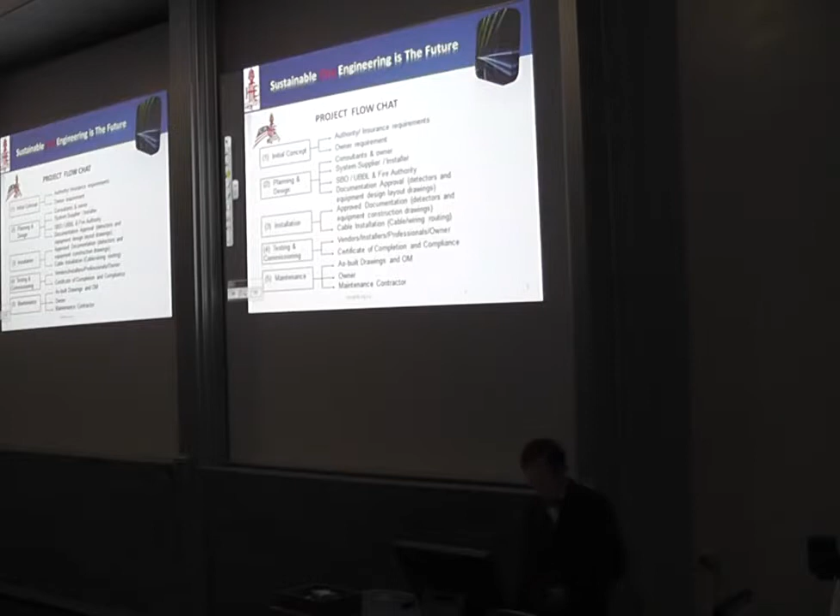Once the building is completed, you need to do proper maintenance. A lot of people spend a lot of money building buildings, but they fail to maintain them. At the end, everything becomes a white elephant.

This is actually a high-speed water deluge system at a workstation in an ammunition depot. They use optical detectors joined up by optic fiber to have a response of probably about 100 milliseconds to activate the suppression system. It's very effective.

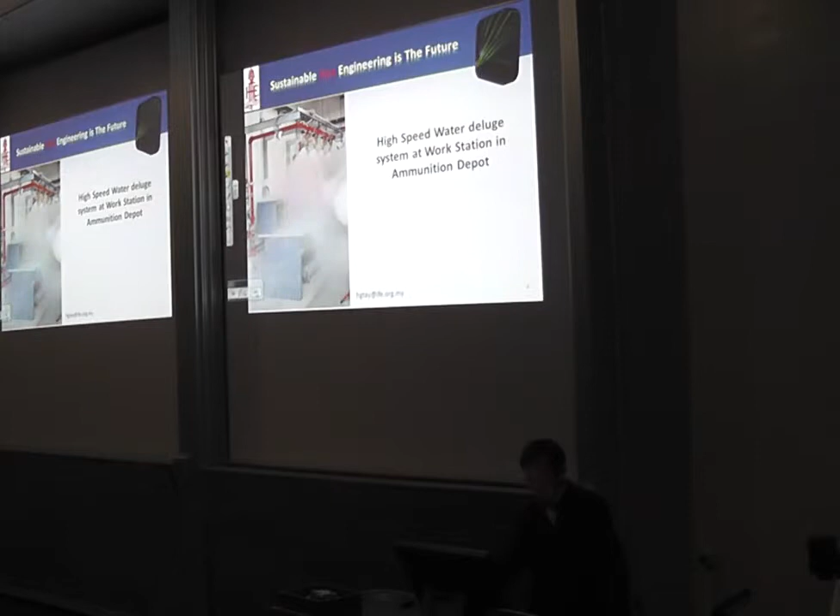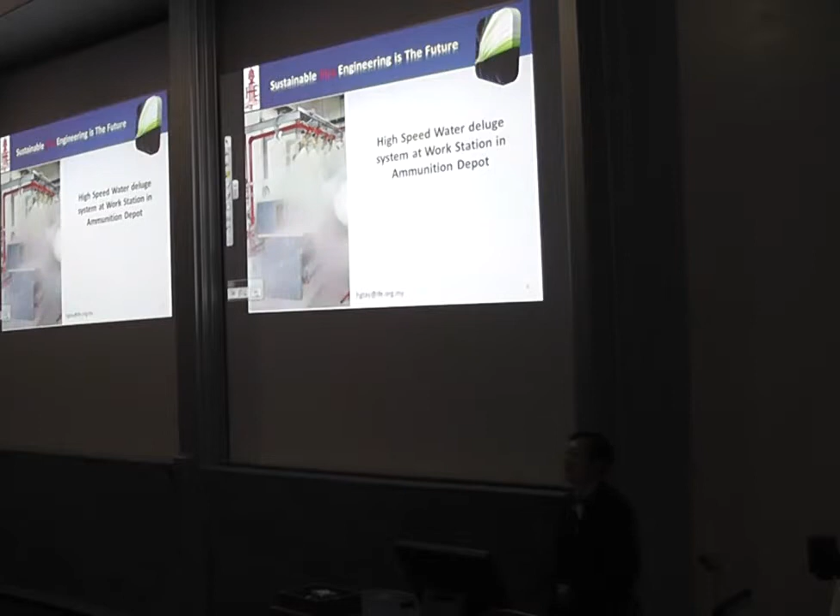But then Singapore, when they built their ammunition depot, changed the concept. They said, why should we go to that extent to allow a fire to happen and then try to put it out? It's always lousy to have post-fire action. I think nowadays we should look at pre-fire, preventing things from happening. So what they did for the ammunition depot, for the few rooms used for storage, is lower the oxygen content so that no fire can ever happen. That's the new thinking, and of course there are other safety measures they have to deploy.

I think nowadays all fire engineers will have to look at changes in our environment. We cannot just look internally, we have to also look at the external factors that are going to affect the design of a building.

Tell me, is bungee jumping more hazardous, or driving on the motorway? Motorway. Why? There's more of it - big volume, big problem, big volume of people. I think you're looking at the duration of exposure to risk. Agree? I did my bungee jumping in Queenstown, New Zealand. The whole process was over in about 5 seconds. Driving from here to London takes you, what, 5 hours? So you look at the duration of exposure to risk.

If you happen to be born in one of these countries around this so-called ring of fire, the Pacific ring of fire, you are a little bit unfortunate. Alright, so you see, sometimes risk is beyond our control.

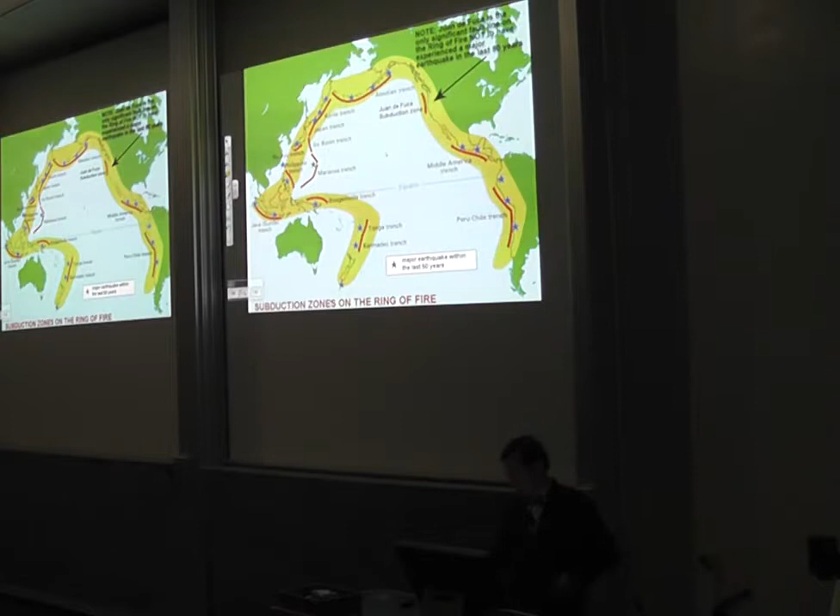I think all of you are aware of this natural disaster that until today, the Japanese government is trying to deal with. Now Japan, I believe, other than the US, is one of the most well-prepared countries in the world. Now how on earth did all this happen?

When we start looking at the precaution measures that were taken, suddenly we find there's still room for improvement. Of course there are a lot of other reasons I do not want to mention here. Apparently, about 3 months before the disaster struck, they were supposed to carry out a risk assessment exercise. They did not carry it out, but rather faked a risk assessment report. So you see, things can also happen in advanced countries like Japan.

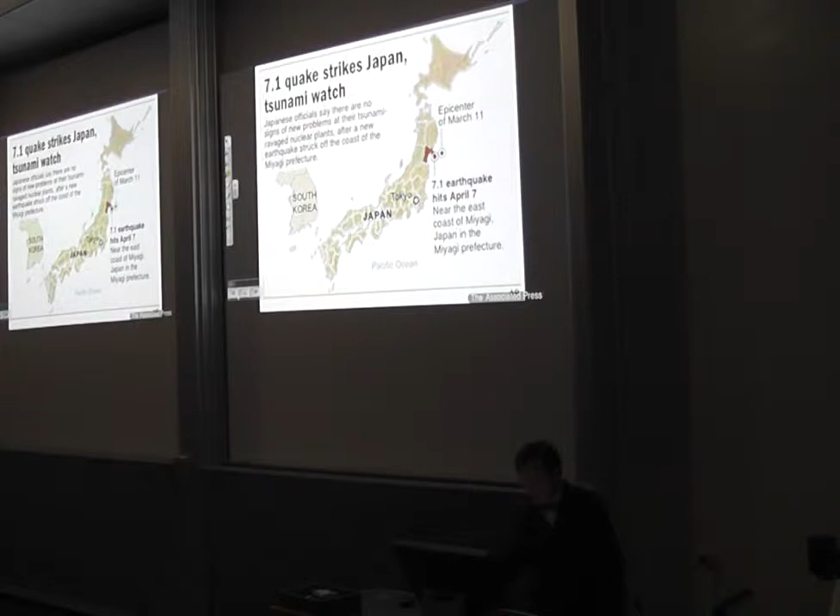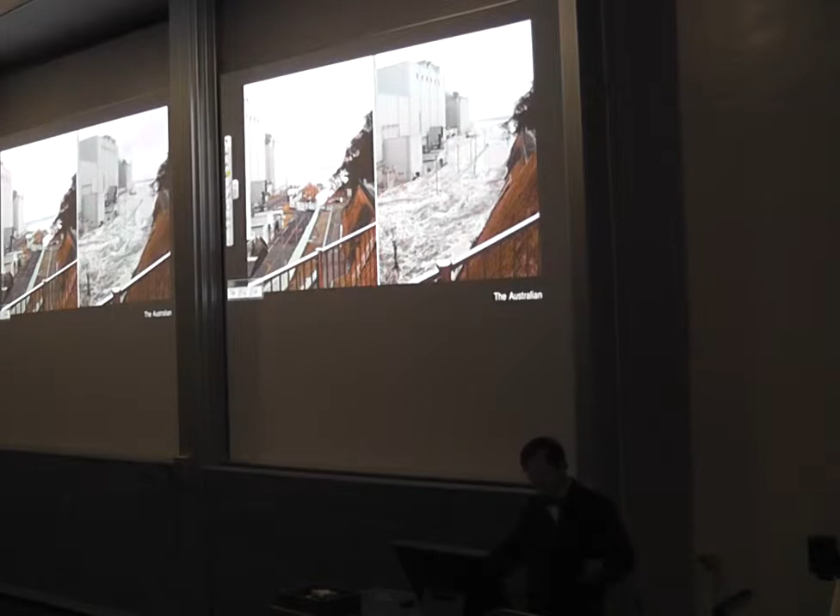They do anticipate earthquakes and tsunamis, but the design of the wall to stop the tsunami wave wasn't high enough. So you have the disaster. Can you imagine such a beautiful country totally destroyed?

And the problem does not stop there. With the radiation, probably a lot of places will not be habitable for the next, I do not know how many decades. We cannot ignore the force of nature. If you look at all these pictures, they paint 1,000 words. One lesson we learn out of that.

If you look at this particular township near the coastal area, only the concrete structure buildings remain behind. The rest of the wooden buildings are all gone. And yet they are green.

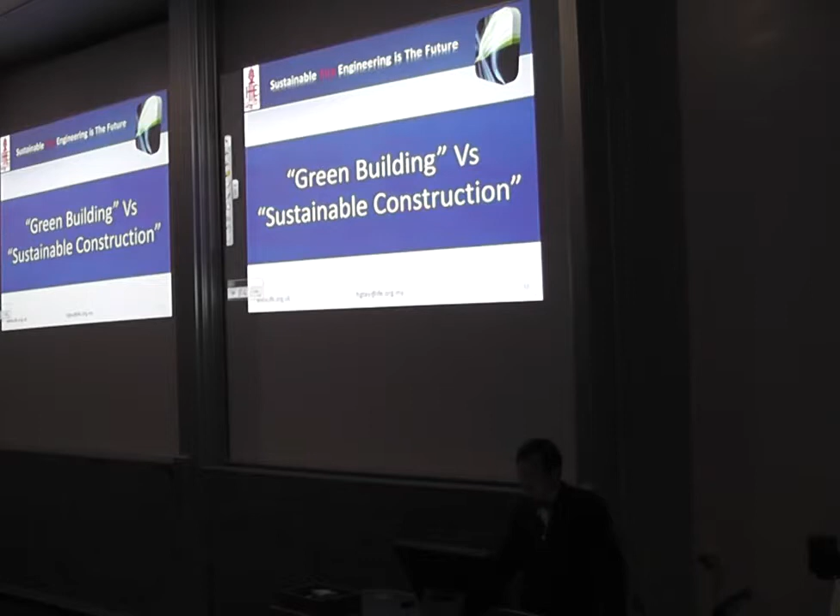So how do we look at sustainable built environment? We have to look at the challenges ahead. So, green building, sustainable construction - are they the same? Or are they variants?

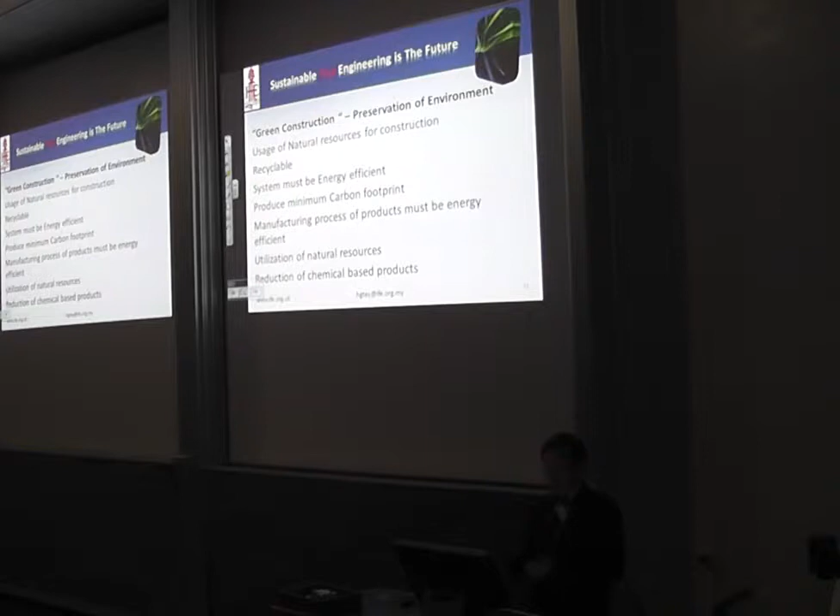For green construction, you look at preservation of environment, usage of natural resources for construction, material must be recyclable, system must be energy efficient, must produce minimum carbon footprint, and the manufacturing process must also be energy efficient. And of course, you must use as much as possible natural resources with reduction of chemical-based products.

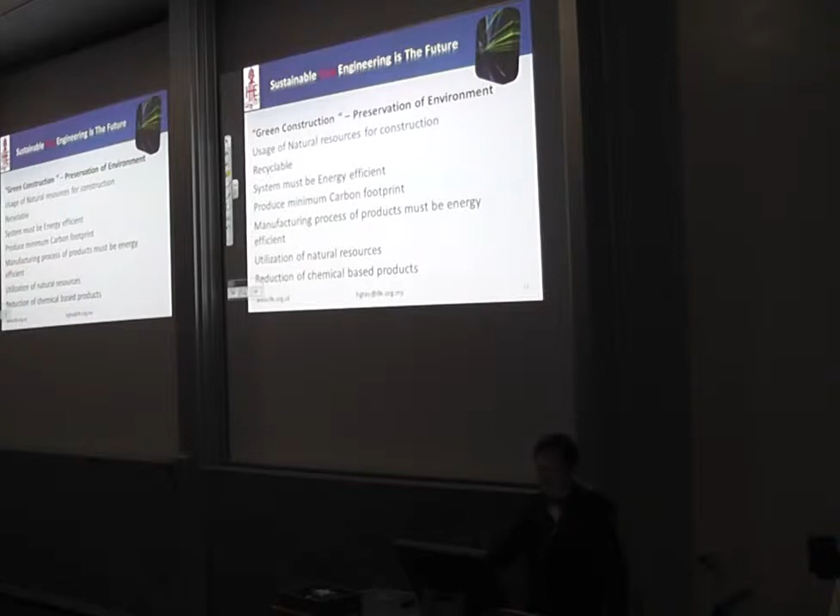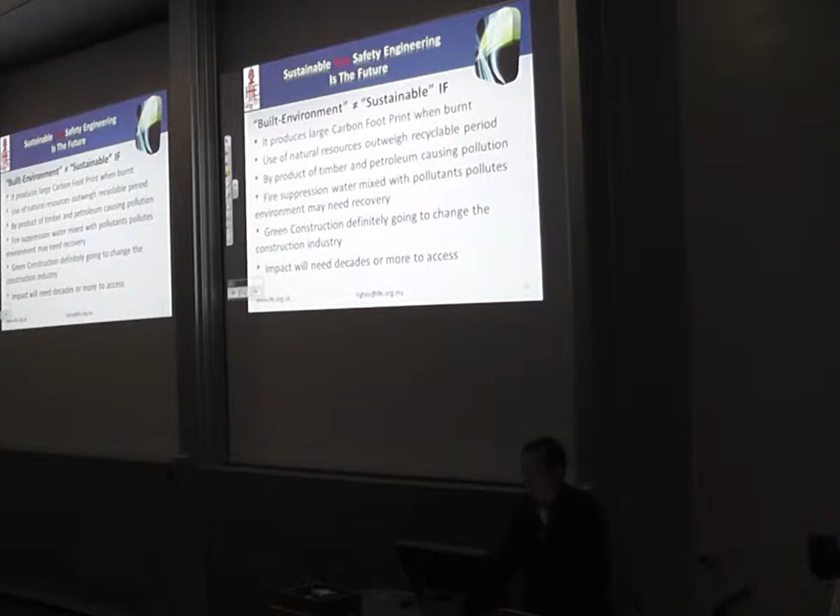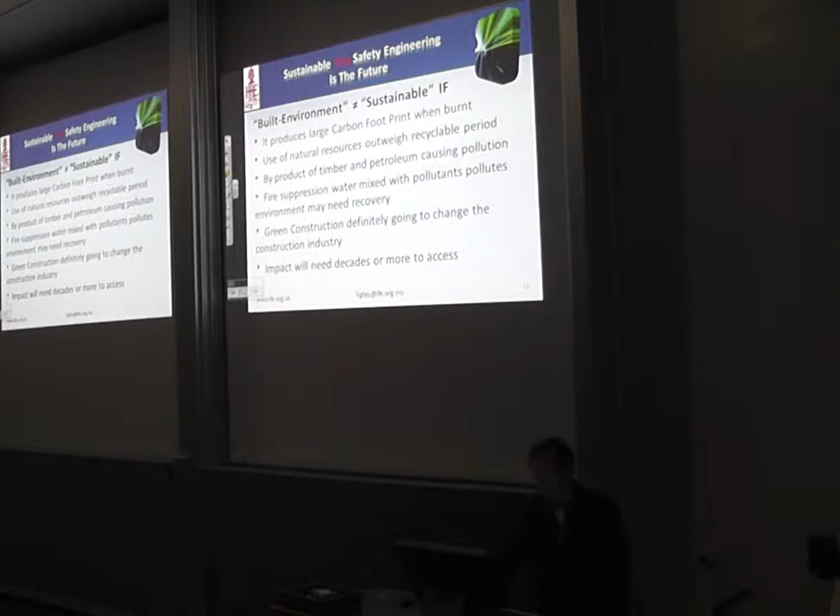But built environment is not sustainable if it produces a large carbon footprint when burnt. Use of natural resources can outweigh the recyclable period. For example, timber - yes, you can grow a tree again, but if timber construction is easily burned and a tree takes 20 years to grow, you can do the mathematics. Byproducts of timber and petroleum also cause pollution.

If you look at synthetic products versus organic products, there is a lot of difference in the byproduct generated due to a fire incident. Now we are also looking at fire suppression water mixed with pollutants, which also pollutes the environment, and they also need recovery. This is a very, very expensive exercise, and they're still pondering how to do it properly.

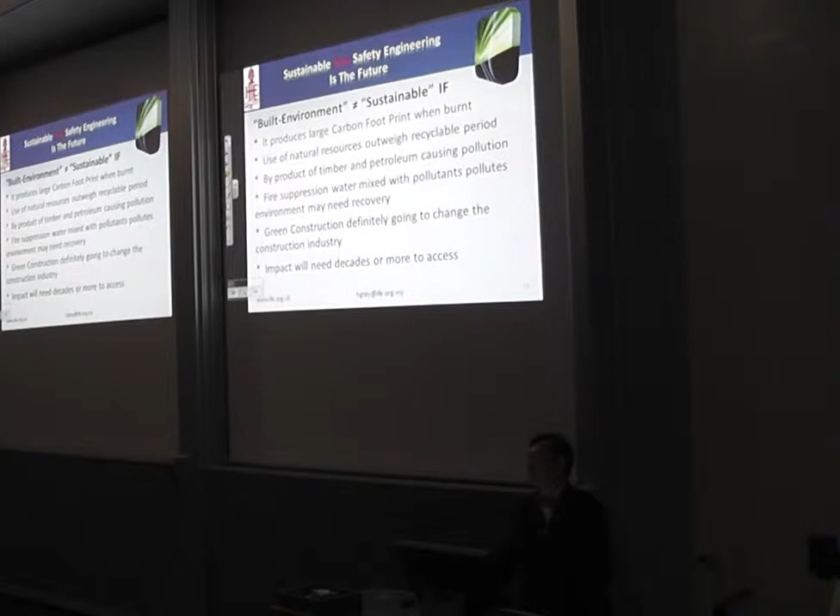Green construction, even though we are deliberating now, is definitely going to change the construction industry. But the impact probably will take decades or more to assess. If you look at major fires nowadays, the tank farm fires, the amount of pollution is terrible.

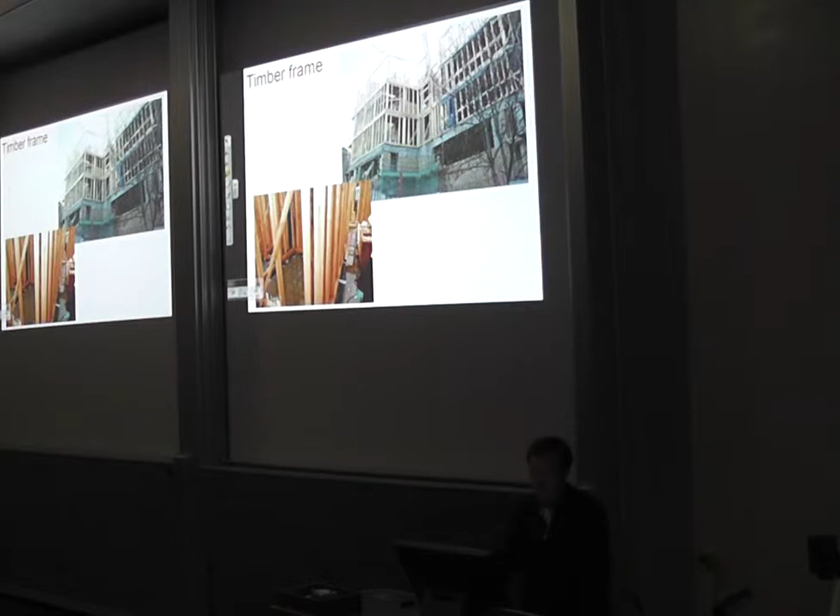In Europe and other parts of the world, they are trying to experiment with timber frame buildings. But it does produce a lot of fire risk for the firefighters. In fact, when we were at one of the conferences, the Deputy Commissioner of London Fire Brigade said that with this type of construction, their firefighters are actually safer now, because by the time they get to the fire scene, everything was burned down. Firefighters don't even need to go in and risk their life. It may be a joke, but it reflects the irony of the so-called green concept.

There are a lot of so-called innovative designs of drywall construction. But if you look at the materials selected, not only are they highly combustible, the byproduct of the insulation material is also highly toxic. So I think we should not be looking at just one particular criteria. In Malaysia now, we are looking at using toxicity as a mandatory criteria for selection of materials.

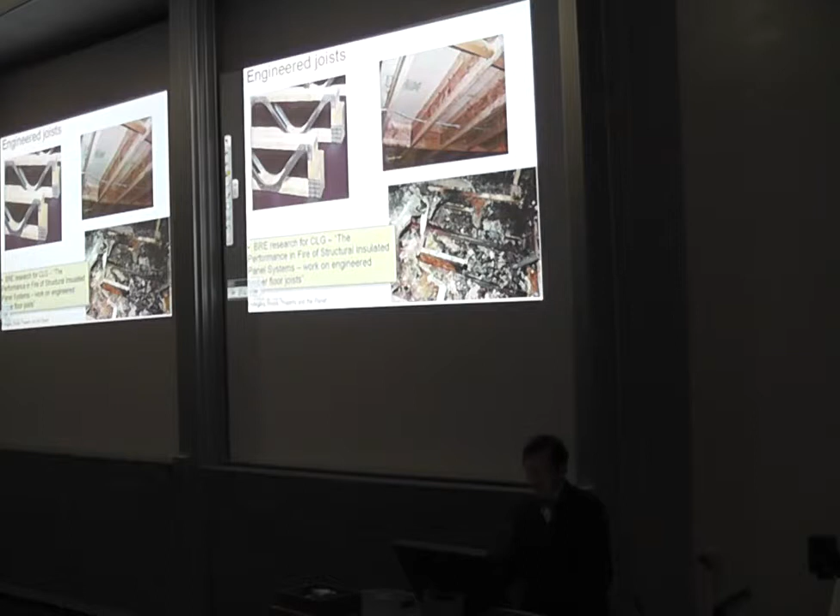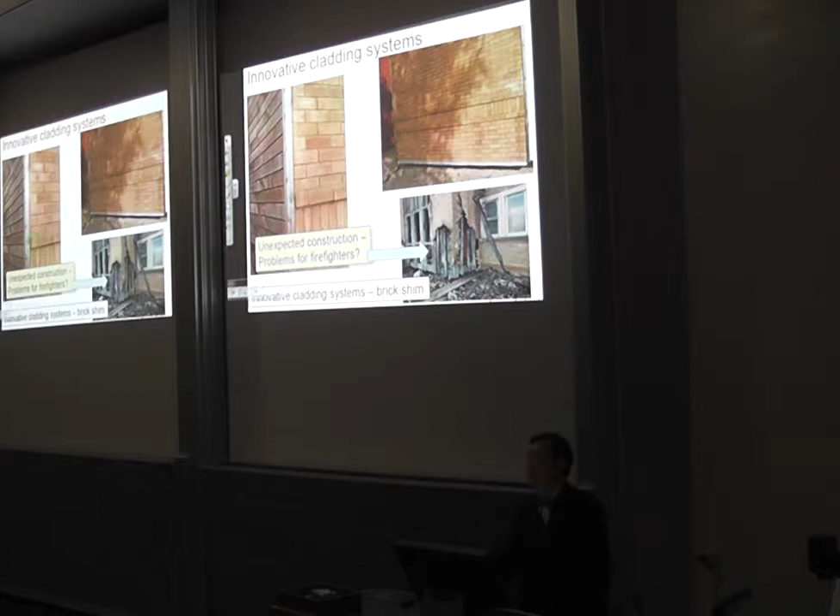Looks like a brick wall, but is it brick? It's not, it's chipboard. You can see that. It's camouflaged with only a layer of mortar externally.

I think the danger about all these new, innovative cladding systems is, other than withstanding the fire rating, can they also withstand the pressure of the jet when firefighters put it on? After 1 hour, the whole structure might collapse under pressure.

So you see, it's more than just talking about toxicity of the material. We are also looking at the life safety of the firefighters, because when you have a fire alarm, everybody else runs out of the building. Who runs in? Firefighters.

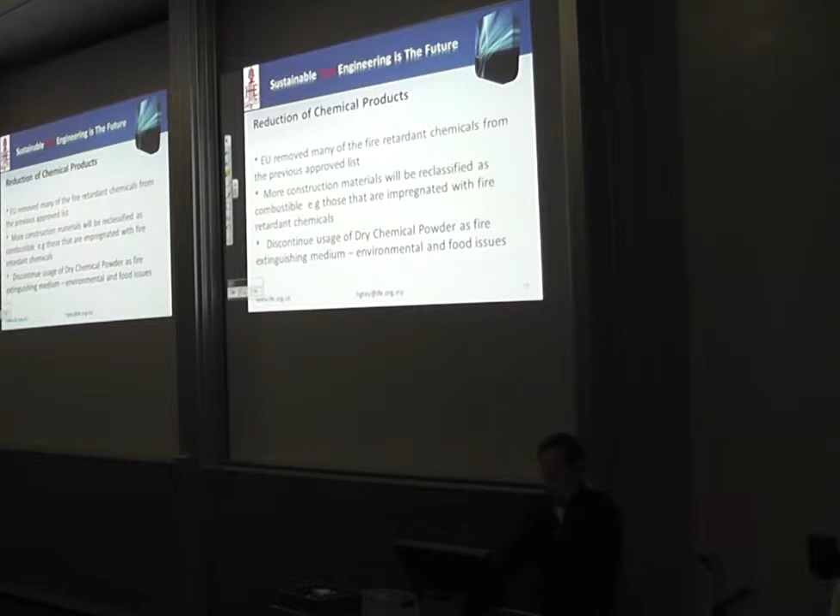Reduction of chemical products is the right direction to go. The EU removed many of the fire retardant chemicals. I think that's the way forward.

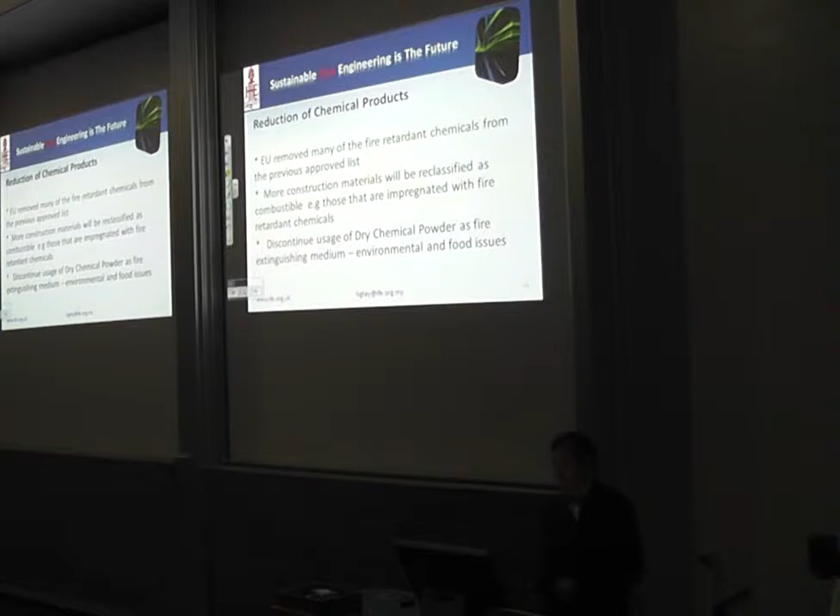But that also has implications, because now more construction materials will be reclassified as combustible. In the past, we impregnated those materials with fire retardant chemicals, but nowadays, with those prohibited from being used, carpets and all that will then become combustible.

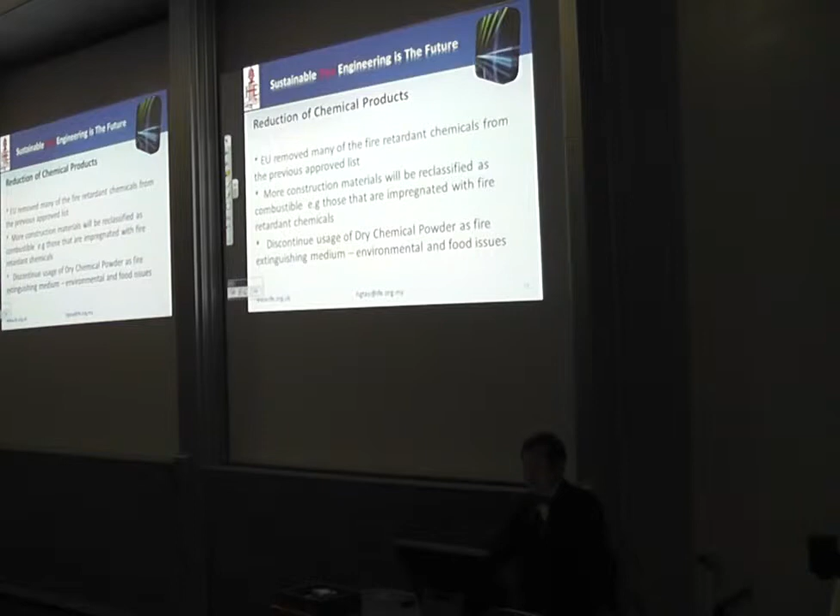Also, there is a trend - I believe Europe already did it - dry chemical powder is not allowed to be used for portable fire extinguishers. In fact, if you look at dry chemical powder, they're actually chemical based.

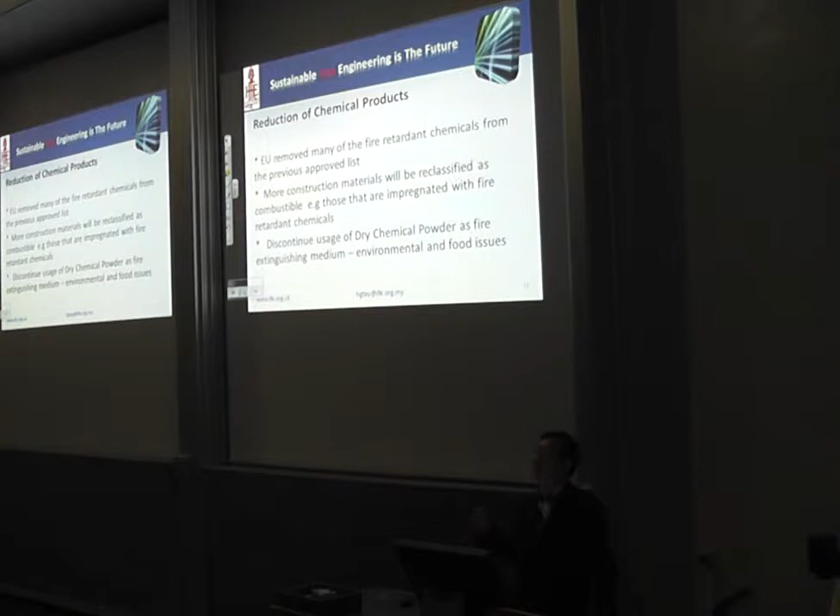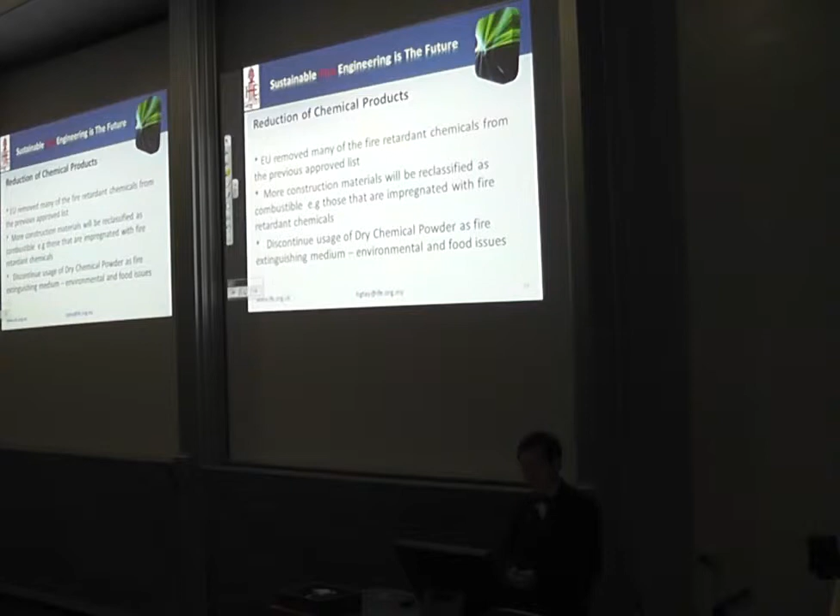And because of the world shortage of food, dry chemical powder is actually being used as fertilizer. So there will be great competition, and definitely the food industry will need more fertilizer than the fire industry. So Europe has now turned to water and foam.

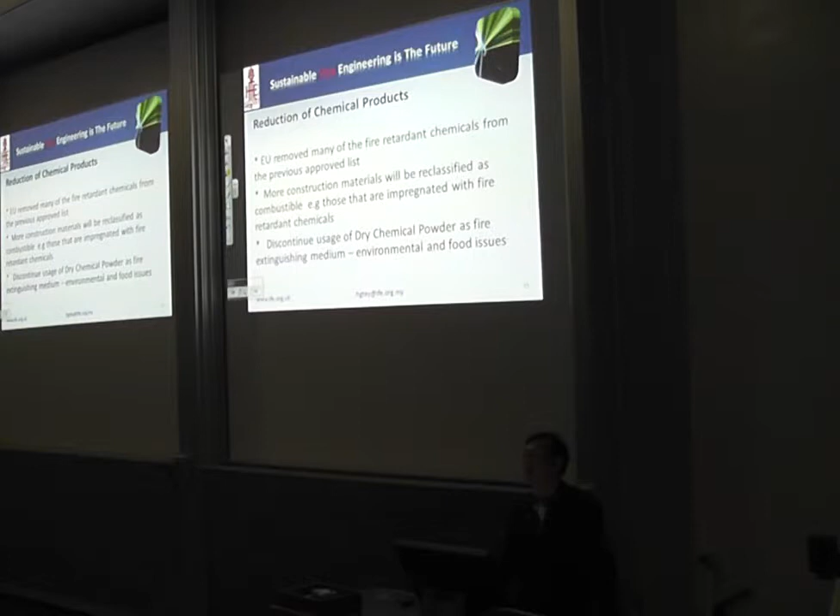I don't know whether any of you have tried your hand on the dry chemical fire extinguisher. Has anybody tried using one? Do you find a stench smell coming out of the powder? One word of advice: you better make sure you select the upwind area, otherwise you might look like a Christmas tree.

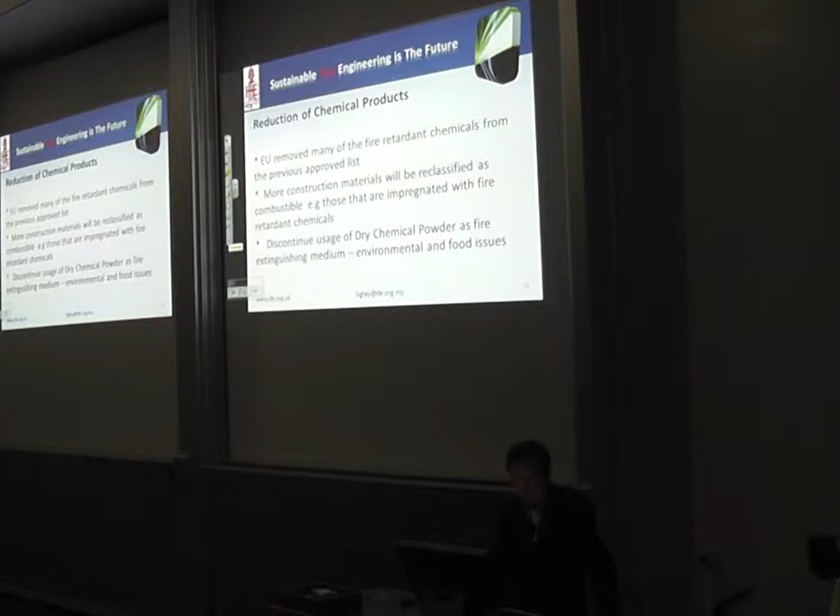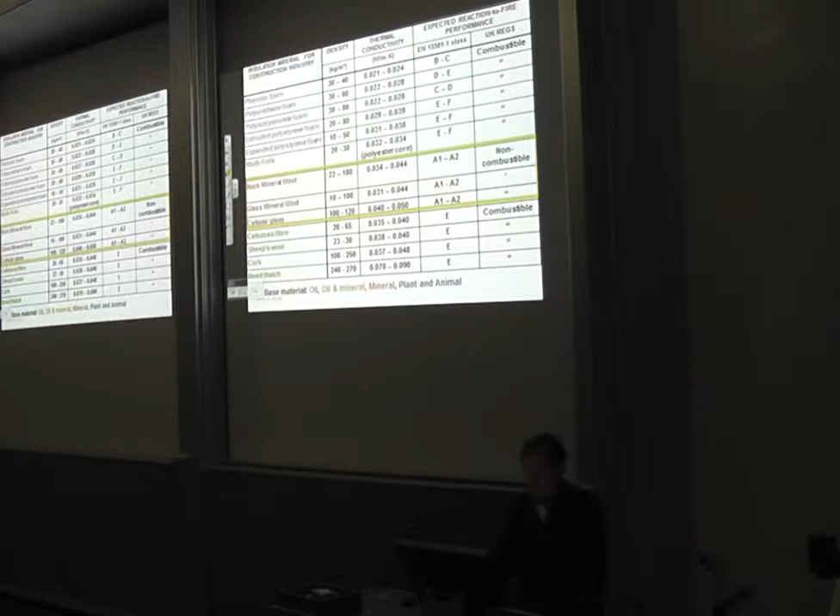Next thing we're going to look at is fire hazards and fire risks.

Fire nowadays, the so-called modern fire, changes in character, changes in duration, changes in many things, because we use so many types of synthetic materials.

Modern synthetic materials generate high heat flux, moderate smoke intensity, but ever presence of toxicity. And through that, it increases the pyrolysis process and shortens the flashover period. That makes it very, very dangerous.

Now, most buildings, when they are constructed, architects will design very basic finishes. Most of the internal finishes are all carried out by interior decorators. This group of people are not under any jurisdiction. They do not need any approval. And yet, they are the ones who put all the fire risks into the building.

Because of budget constraints, interior decorators, when they put in furnishings, normally look for economical materials with aesthetic value. But a lot of these materials are highly combustible. That's reflected in so many fire incidents around the world.

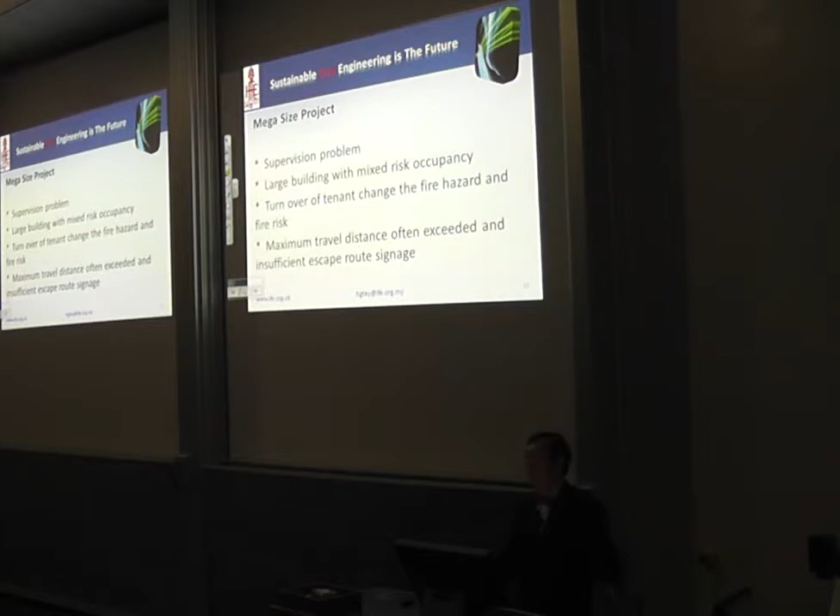Also, mega-sized buildings come with mixed risk occupancy. It's very different from an office block or hotel block. You have office, hotel, apartment, shopping center, restaurants, everything within a complex. More important, the turnover of the tenants. You could conduct safety briefings for the tenants, but if the turnover of the tenants is large, then you're going to have another problem. Plus, a new tenant could bring in new risks. Just like a telco company that occupies 3 floors of a tower block. Imagine how many tons of PVC cable they're going to bring in with them.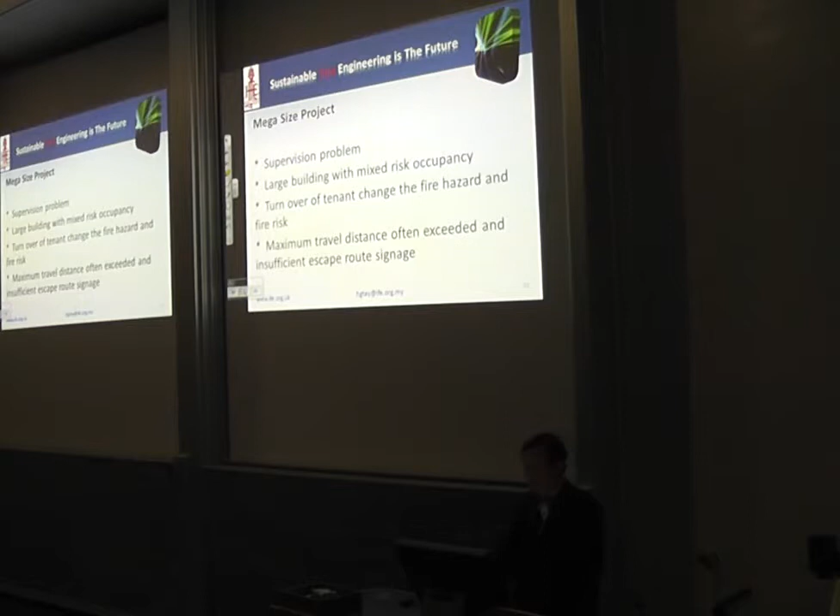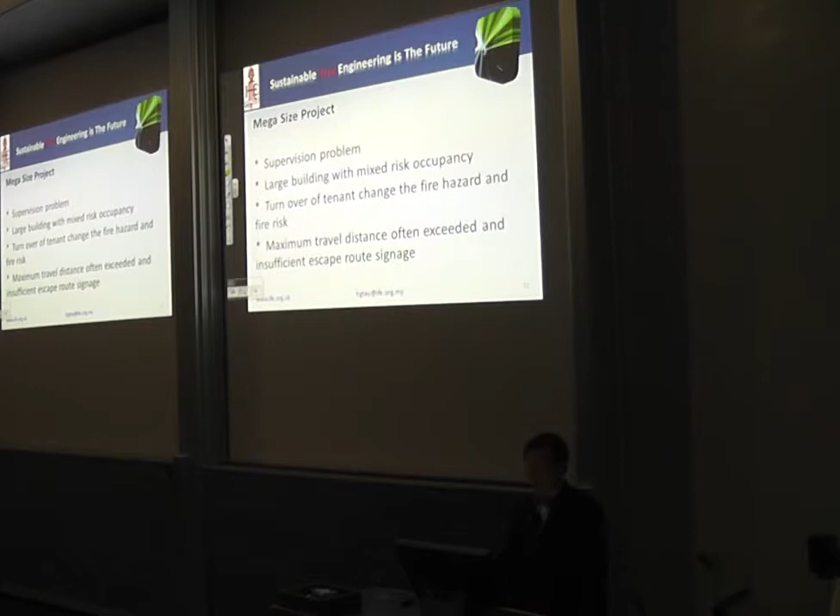And because of the sheer size of the project, maximum travel distance is often exceeded. If you go into one of the major shopping centers nowadays, you'll have a hard time finding the escape route if you're not familiar. And under the influence of smoke and heat and the commotion, orientation of direction will become a problem, especially with the seasonal crowd density. During the festive seasons, the crowd intensity definitely increases. What about tourists who come into the country and are not familiar with the language?

So crowd control becomes one of the major problems for modern construction during an emergency. And it's very, very difficult because human beings are at times not controllable. You can set up a lot of procedures, you can do a lot of drills, but under panic conditions, everybody behaves very differently. You're looking at fire. What about gas, explosion, tremors, possible terrorist attack? Who is going to manage all this?

So it's no longer only a building owner's problem. The emergency response planning and management must be jointly conducted by building owners, fire authorities, civil defense force, National Safety Council, etc. And it must be conducted with tabletop drills, followed by actual drills.

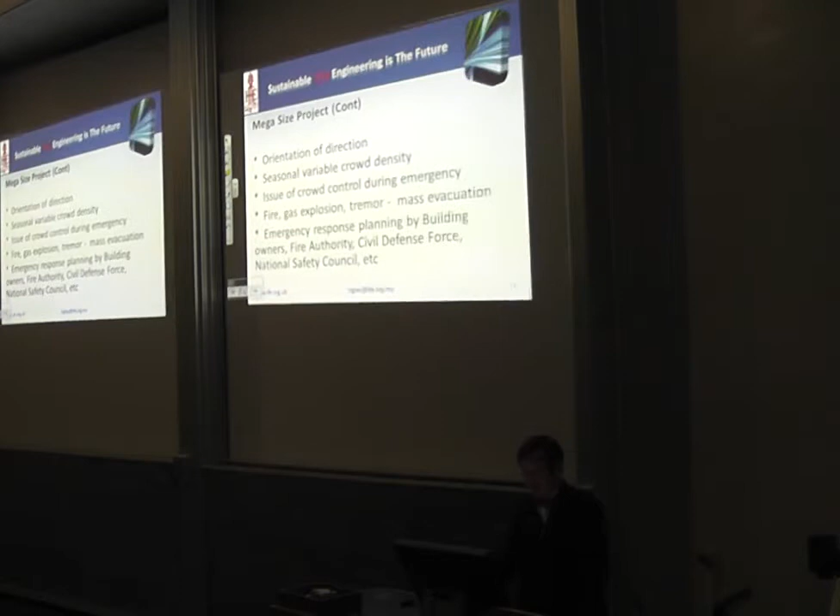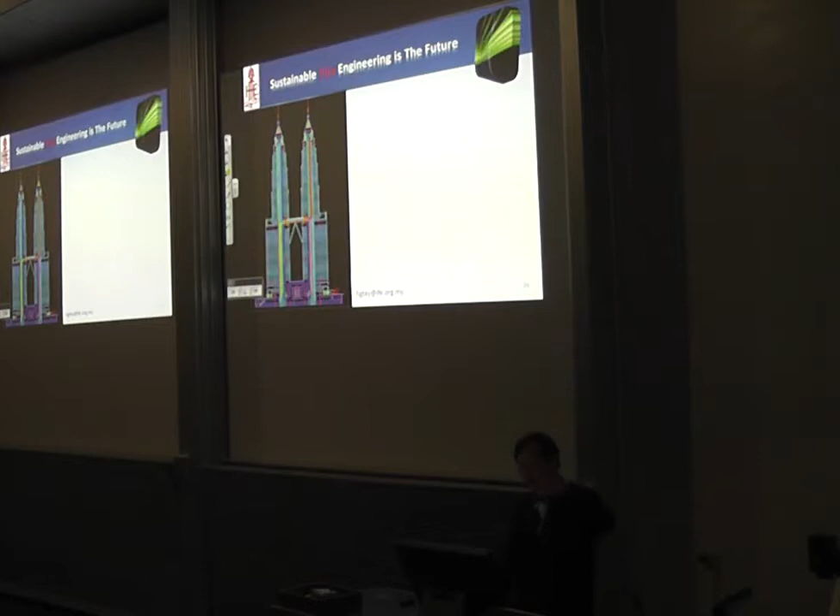Twin Towers in KL, how do you evacuate all the occupants? We divide the building into two halves. So if you have a fire on the lower part of the tower, on the left-hand side block, the top half of the tower will be asked to evacuate by staircase. In the tower on fire, the occupants will be asked to cross over the sky bridge on the 41st and 42nd floor. And after that, all of them will be taken down by high-speed lifts.

But having said that, this cannot be a general ruling applying to all high-rise buildings, because it has to be carefully planned and it also must be managed. Which means that the management must have sufficient personnel to be trained and to manage all the crowd. All the lifts are operated by operators, not by the occupants. Everybody is trying to beat each other. I mean, how are you going to evacuate buildings of this nature?

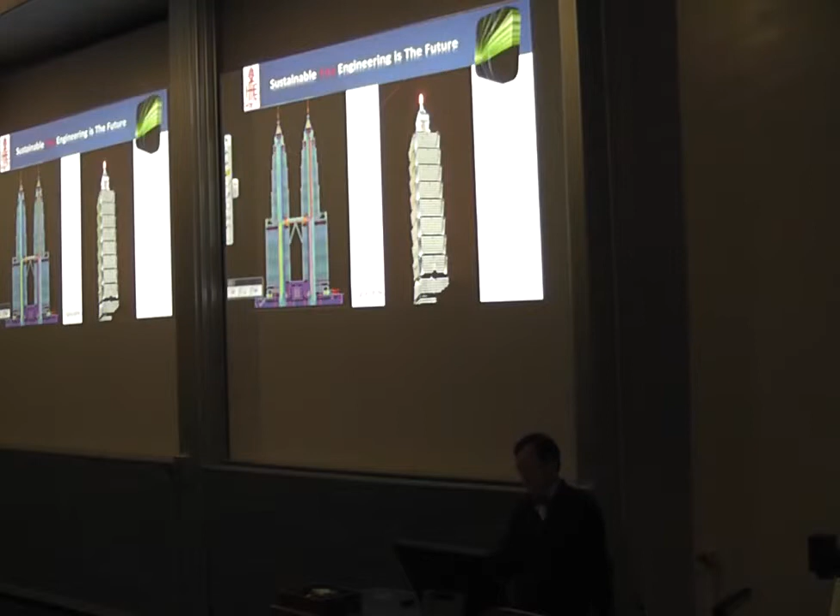I was in Hong Kong recently, and now in Hong Kong, they have a building requirement that every 25 floors for high-rise buildings, you must provide a refuge floor. Of course, they are saying that if the building is about 80 stories high, not everybody can evacuate by staircase from the top to the bottom. I agree. So they set up a refuge floor for you to have a rest.

Sounds all very good, and they also break the continuity of the staircase. So every 25 floors, you have to go around the refuge floor to descend by the other staircase. The thought behind that is that if you have one staircase going from the top floor all the way to the ground floor, in case the fire or the smoke gets into the staircase, nobody else can get out. But if you break the staircase, of course, it's safer.

But there are a lot of other observations that I made, and since the camera is on, I don't think I want to talk about it here. All right? Tea time, we can discuss.

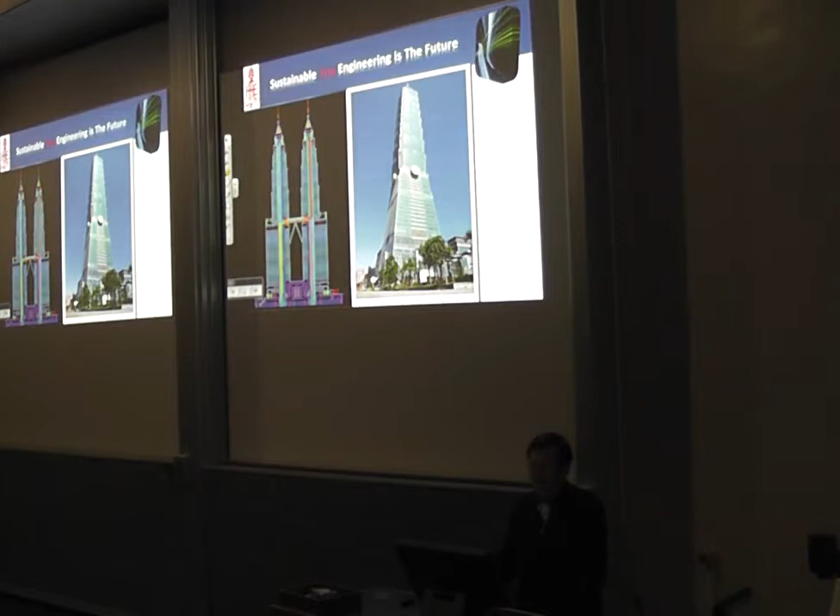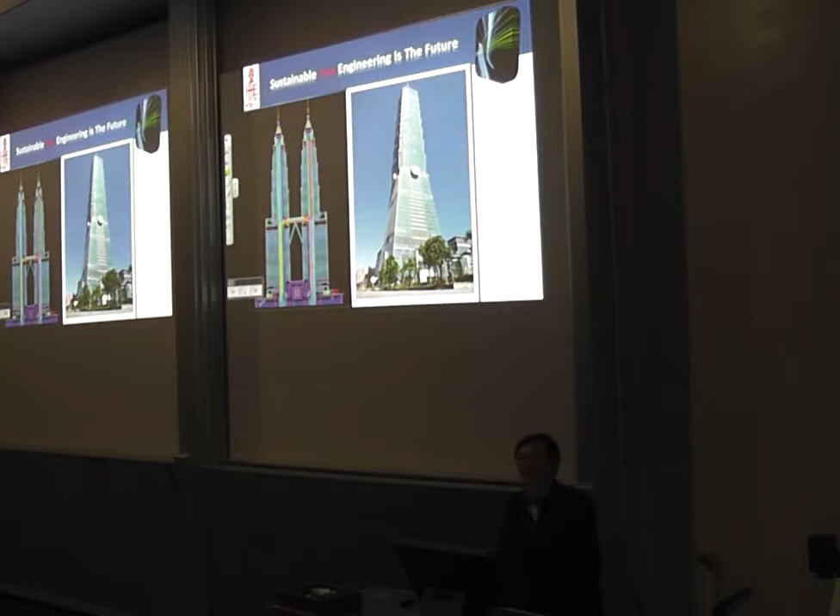There are a lot of things that have to be done because it has to be managed. When people start to rest, the question is who decides, or when are they going to carry on? If you rest for 30 minutes, the situation below, assuming the fire is below, has it escalated to what stage? Is it safe to carry on? Or is it safe to actually stay behind for the firefighters to come and rescue? Who is going to manage all this? There are a lot of question marks.

What about provision for disabled, sick, pregnant ladies? Injuries during egress. A lot of people panic, they slip down the staircase, break their arm, break their leg. What about those who have suffered possible heart attacks? Are the management ready for all these emergencies? Or they expect everybody to be young and healthy?

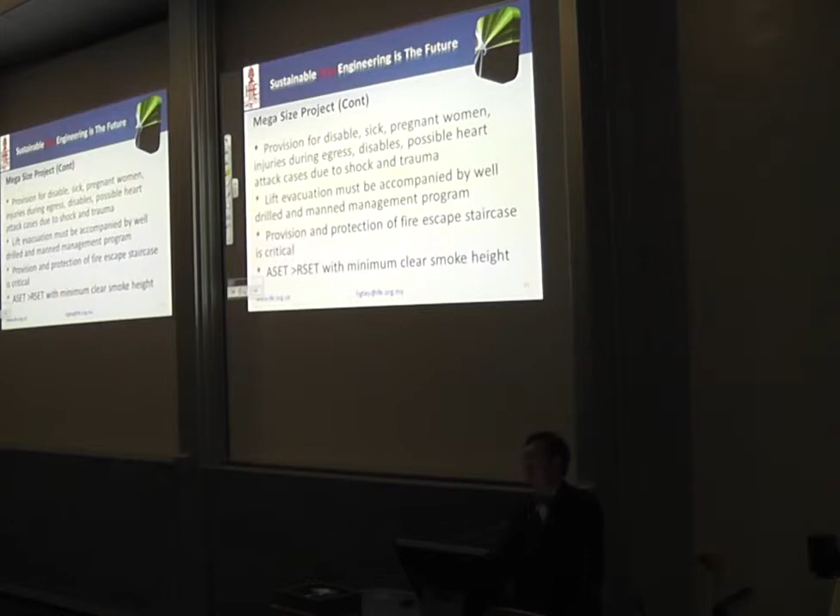So lift evacuation must be accompanied by a well-drilled and managed program. And I think the most important thing is that you must protect the fire escape staircase integrity. If you look at fire escape staircases, every floor is guarded by a fire door. And yet, a lot of these doors are actually held in open position. There's no compartmentation. Sometimes I was wondering, because when I look at the door, it has a tag that says fire door kept shut. Then you look at ASET must be higher than RSET, with minimum clear smoke height, especially for car parks, underground car parks.

Fire engineering performance-based design has sprung up over the last 5 years. But again, there are a lot of debates going on at the moment as to, is this the future? But all of us know that there's just insufficient data bank on fire behavior. So all the fire safety engineers who perform this, what is their basis? It's basing on the engineers' assumption. How long is that assumption going to last? Because when they hand over the building, the assumption is still valid. Even that, I do not think there's sufficient studies being carried out.

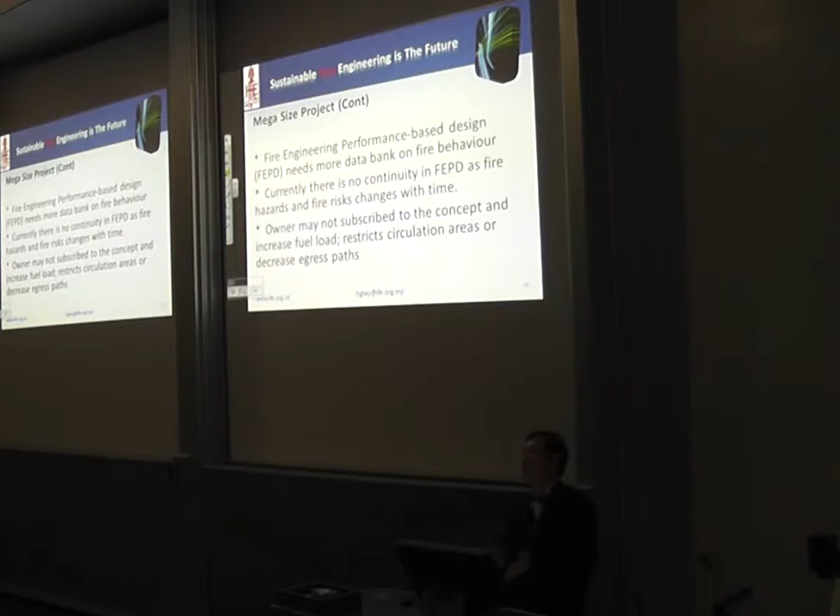But what happened after that? 5 years down the road, the owner doesn't understand what do you mean by fire engineering performance-based. The building manager also doesn't understand what is happening. So they start to look at this space left vacant. It's a waste because commercially they want to make use of every square foot. So they start putting in shops. They start putting in a lot of things. And suddenly you find that your mass evacuation circulation area has been reduced. Your fuel load has increased. Sometimes they move the risk elsewhere. So if you look at 5 years down the road or 10 years down the road, are all the assumptions still valid?

What about human behavior? We design a lot of things. Did we actually look into human behaviors? Because human beings are irrational. A lot of people, if you tell them to go right, they purposely go left. Because they say, why should I listen to you? Right? I challenge a lot of engineers, fire protection engineers. They say, I designed the fire alarm system according to a British standard. I said, prove it to me that it's going to work. You expect everybody to hear the alarm and walk out of the building? I said, no chance. And this has been proven in Australia many years ago through a full-scale investigation.

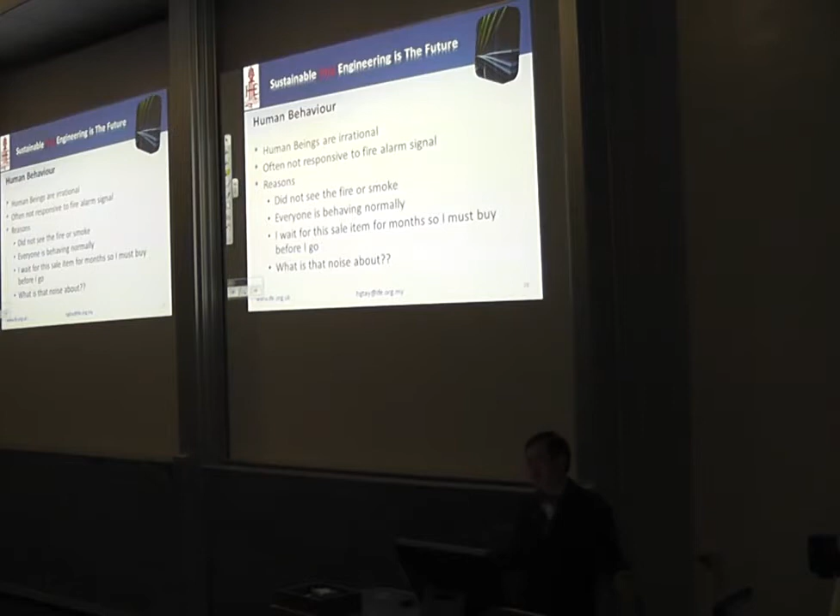What is the reason? Because a lot of engineers who design fire alarm and detection systems, they do not factor in acoustic engineering. You need to do that because you are talking about human beings. A lot of human beings, they do not move because it's very simple. I don't see the fire or smoke. There's no danger. Or everyone is behaving normally, especially in a big shopping center. And this lady who has waited 7 months for the mink coat at 70% off and the shoes and the handbag. She said, you want me to go before I get this? Over my dead body. So you see, everybody has got their own reason, right? And some of them will say, what is that noise about? So public education is also very important.

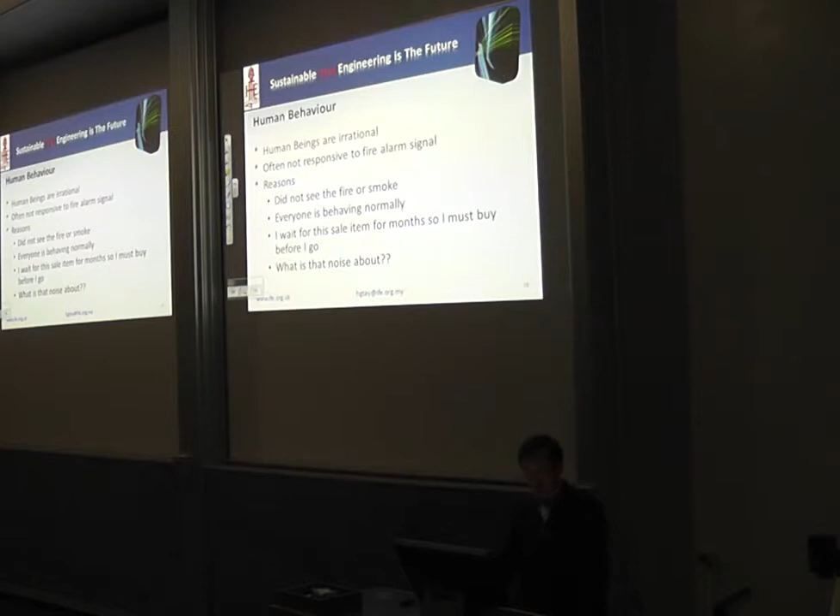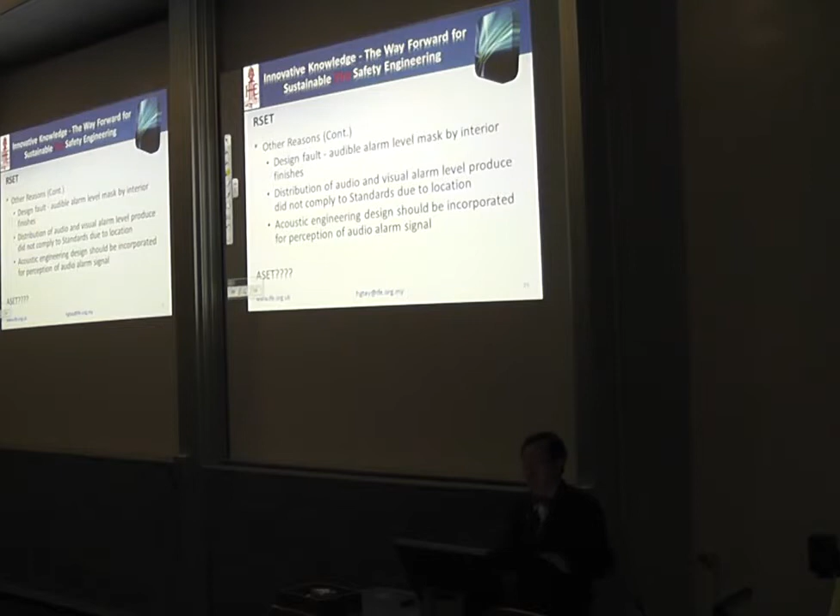There are other reasons too, design fault. Audible alarm level many times is masked by interior finishes. Because as sound energy travels through the air, it loses energy. If it bounces at the surface, part of the energy is absorbed, part reflected. But all these are not being taken into consideration. Also, if you place the audio and visual alarm units, you look at whether they cover; they must be overlapping. If not, you have a space in between where the noise level will drop below 65 dBA that is required according to British standard.

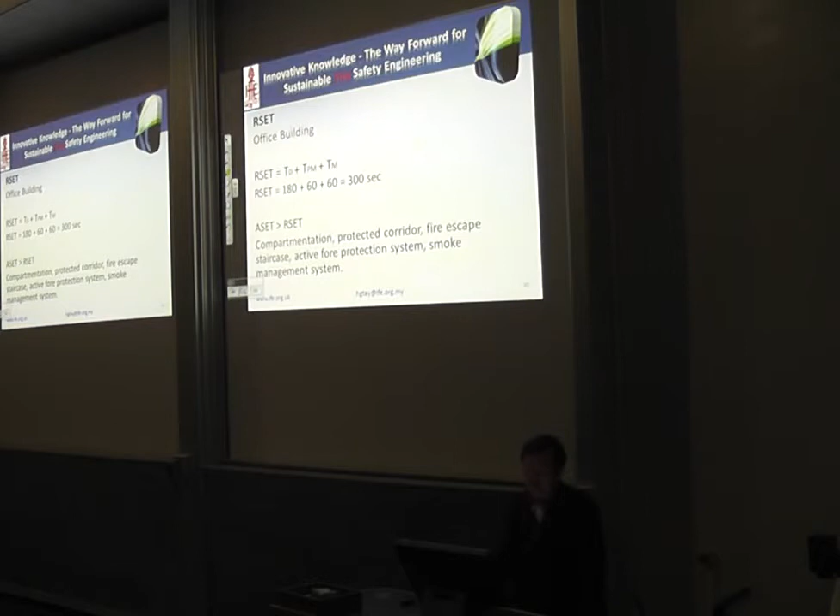So, what happened to your ASET? Let's look at the required safe egress time first. How do you work it out? You look at the time of detection. That depends on what type of detector you have installed in the building. If it is not so sensitive, then of course it takes a longer period of time. And then the time for pre-movement. After you hear it, sometimes you don't move straight away. And also after that, the time of movement. So when you add these 3 factors together, then only you get your RSET. And it varies, of course, according to different types of building and all that.

But if your RSET is higher than your ASET, then you know you're in trouble. So to have a better chance, normally you have to look at compartmentation, protected corridors, fire escape staircases, active fire protection systems, smoke management systems.

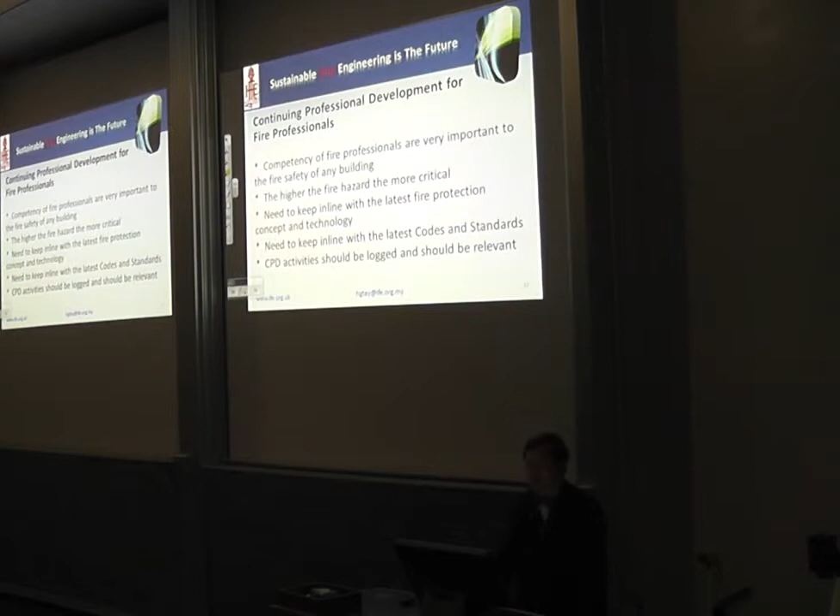I always say that if a fire engineer, after graduating from university, does not continue developing his knowledge or his experience, everybody will be in trouble. Because we all rely on fire engineers to provide us with efficient design. So the competency of fire professionals is very, very important. The higher the fire hazard, the more critical.

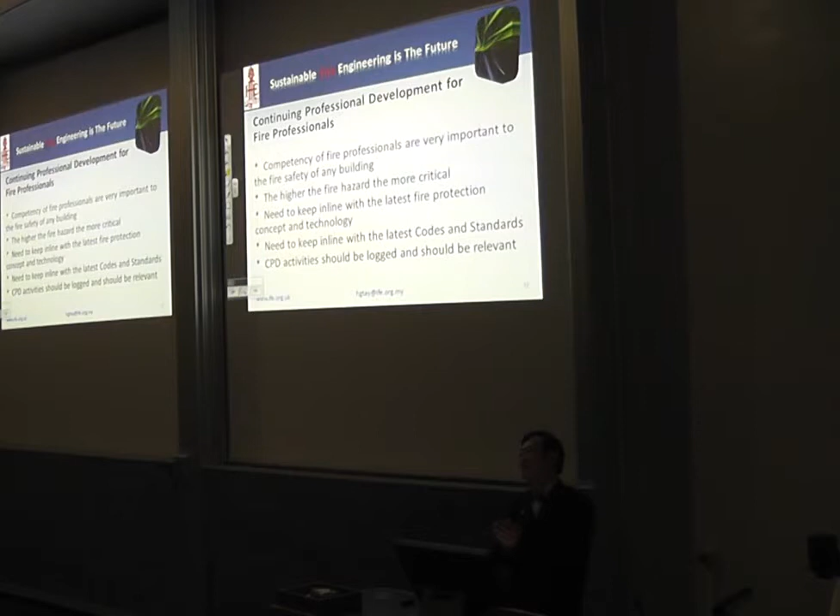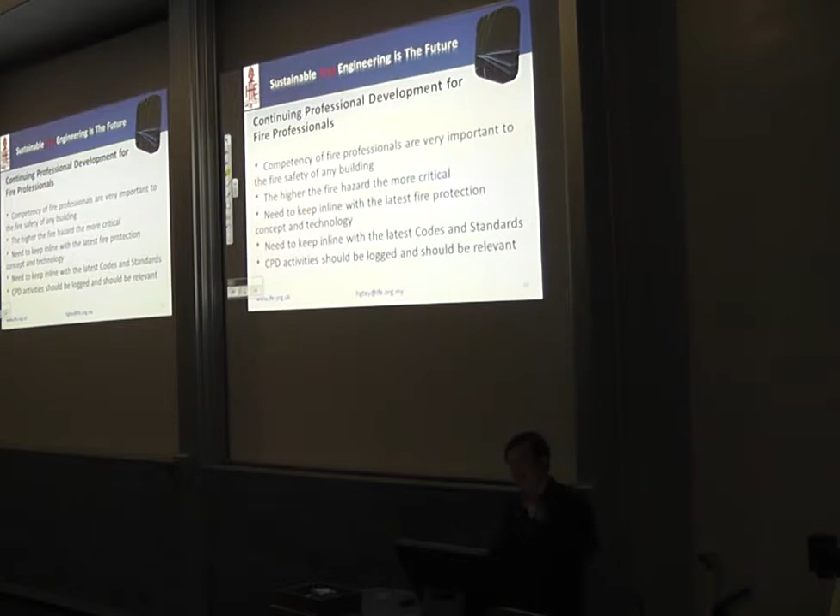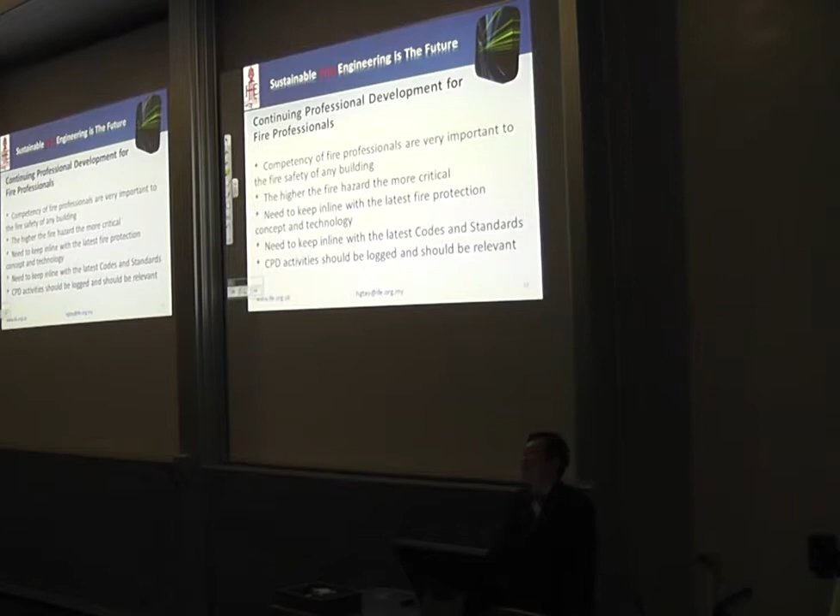We also find that for tank farm protection, a lot of engineers design the hydrant and the monitor so close to the wall of the tank farm. Do you think it's accessible? The heat generated when a tank goes on fire is so high. The last time we had one in Malaysia, the fire authority at first positioned themselves about 100 feet. When the tank farm goes on, they have to move 200, 300 feet. So you see, many times we just follow the old design without reviewing.

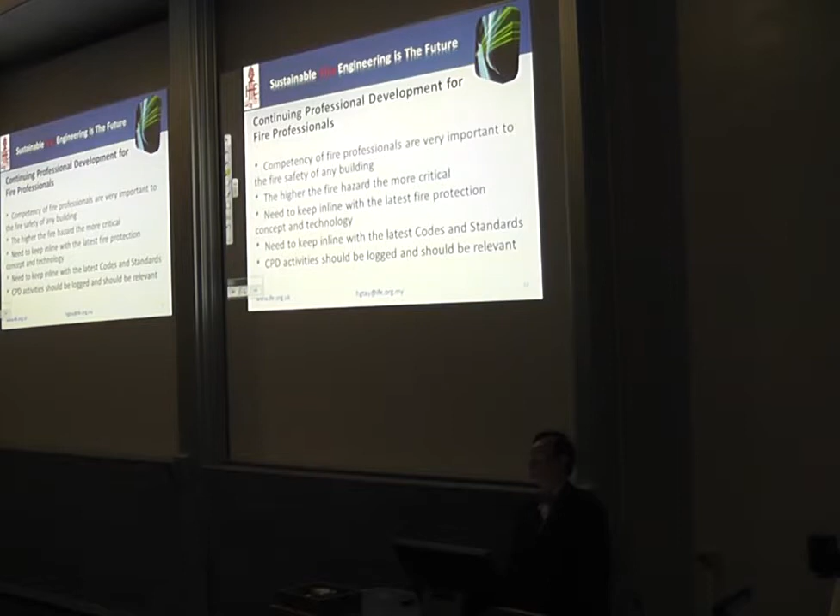Engineers also have to keep in line with the latest fire protection concepts and technology, because everything moves, we improve. And if you are not in line with that, then of course whatever design you incorporate might not be appropriate. And they also must keep in line with the latest codes and standards, because codes and standards are dynamic. They change all the time, probably every 5 years. Therefore, fire engineers must log their CPD activities.

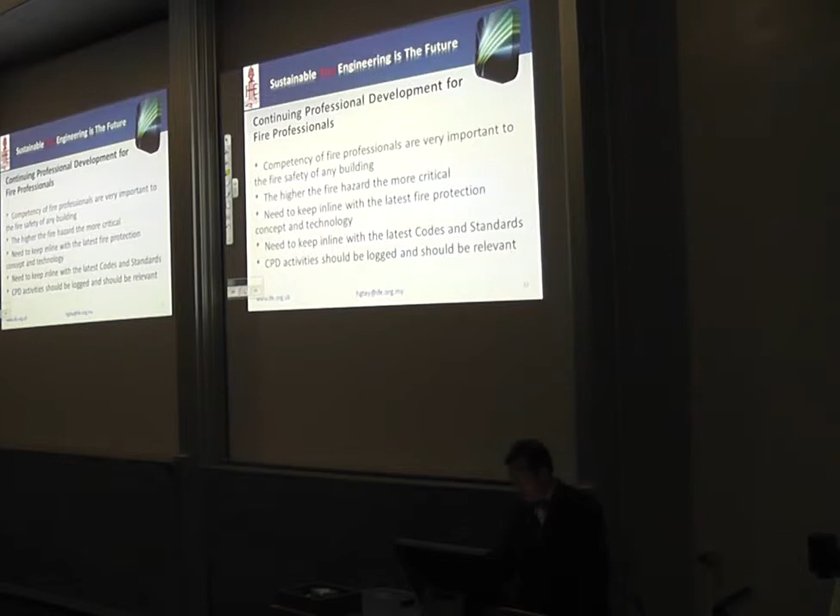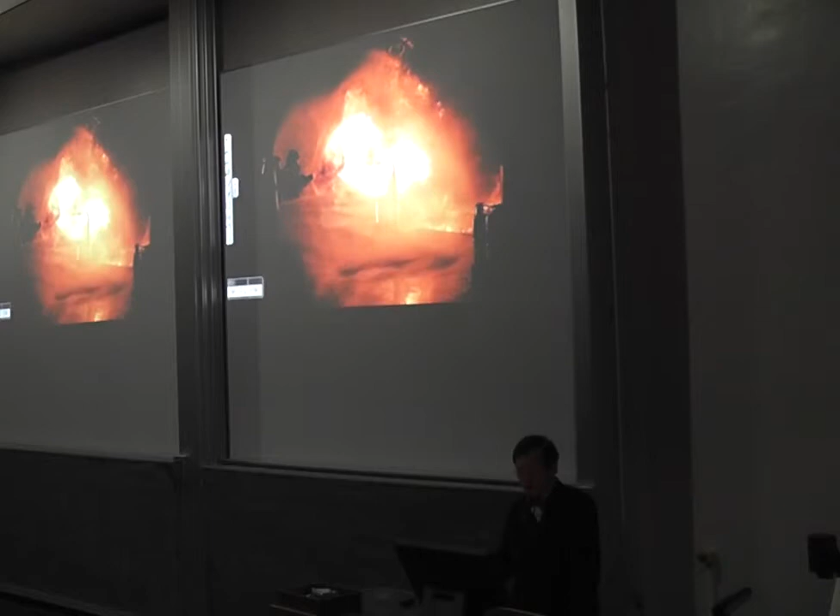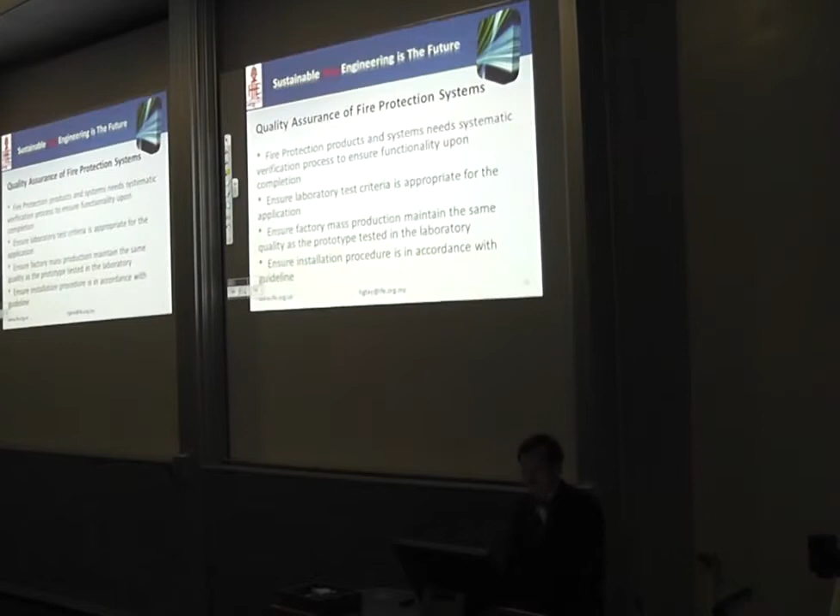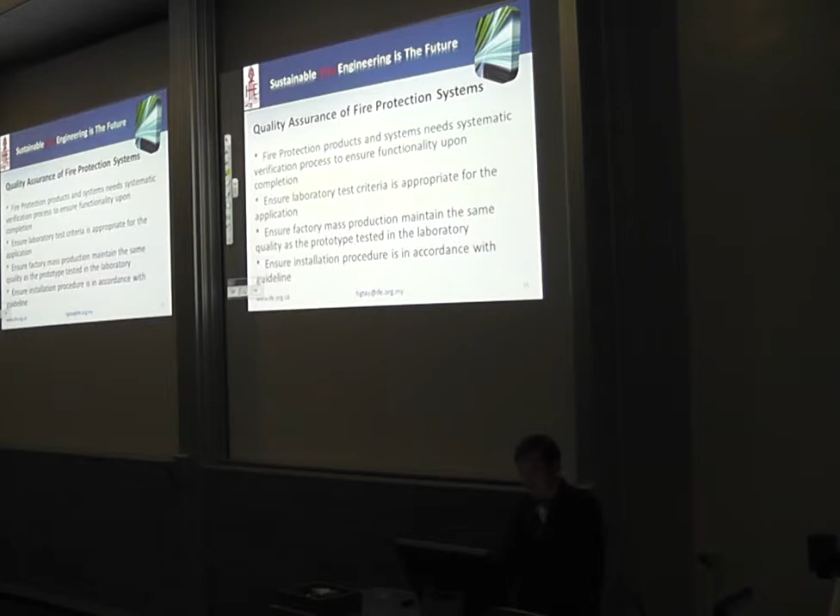Okay, the other factor that we have to look at is quality assurance of fire protection systems. All fire protection products and systems need a systematic verification process to ensure functionality upon completion. There are 1,001 things that can go wrong, because if you look at a complicated system like a sprinkler system, they have so many components. Each of the components must be tested and verified according to a standard. So laboratory test criteria are very, very important.

A lot of these suppliers are very smart. They go to a laboratory and test, but not to the standard that is required. After that, you imagine when they produce a prototype, they spend so much time. Now, when you go into production, the quality drops. If it is within the tolerance level, it's acceptable. But most of the time, we have to be very, very careful.

Then I realized it's just like a car tire. It's subjected to wear and tear because the door is opened for access. So the authorities having jurisdiction picked up doors that had been approved and marketed, before they'd been installed in the project, brought them back to the laboratory and tested them. They failed at 15 to 29 minutes. So you see, a product that is already tested, passed a test, got a test report, does not even stand up.

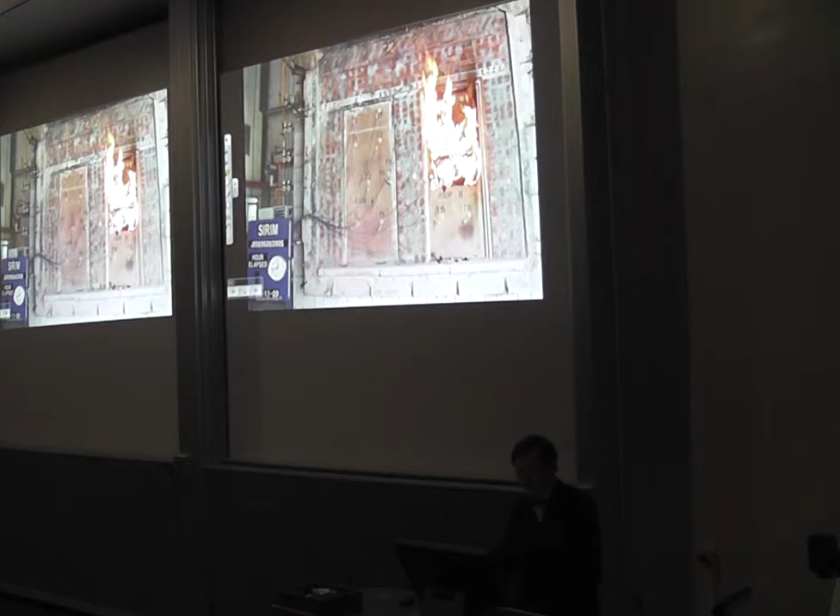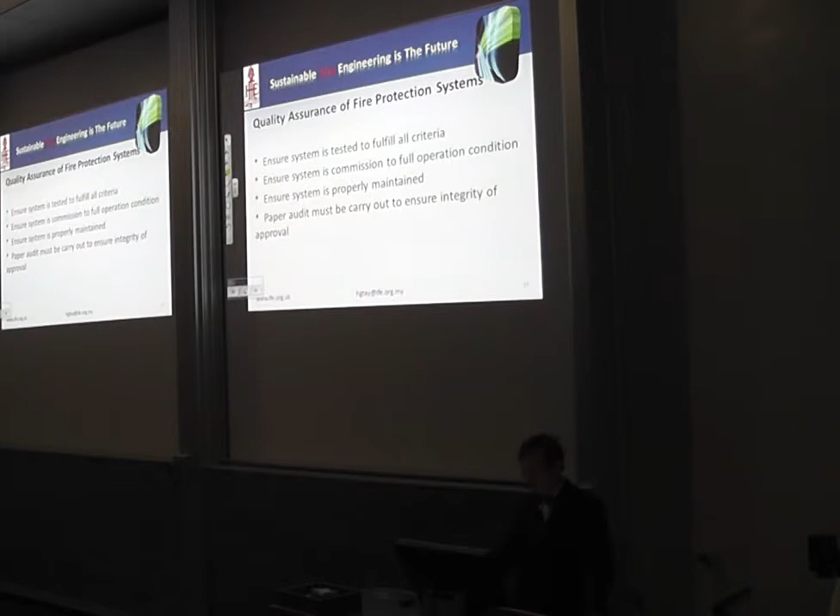So the system must be tested to fulfill all criteria. After that, we must monitor, and I do understand that EN, they have this marking scheme, listing scheme, it's all very well, but still you want to do verification.

Smoke extract system for underground car park is another very interesting area, because nowadays, commercially, a lot of building owners reduce the floor height. When they reduce the floor height to save structural costs, proper fire-rated smoke extract duct system cannot be used because it's too low. So they revert to jet fan system.

The problem with jet fan is that this particular system originally was designed for tunnel smoke extract system. But then tunnel is mostly one-dimensional, as we know. If you look at a car park that is about 5,000 meters square, it's huge. How do you ensure the smoke travels in the direction that you wanted to extract?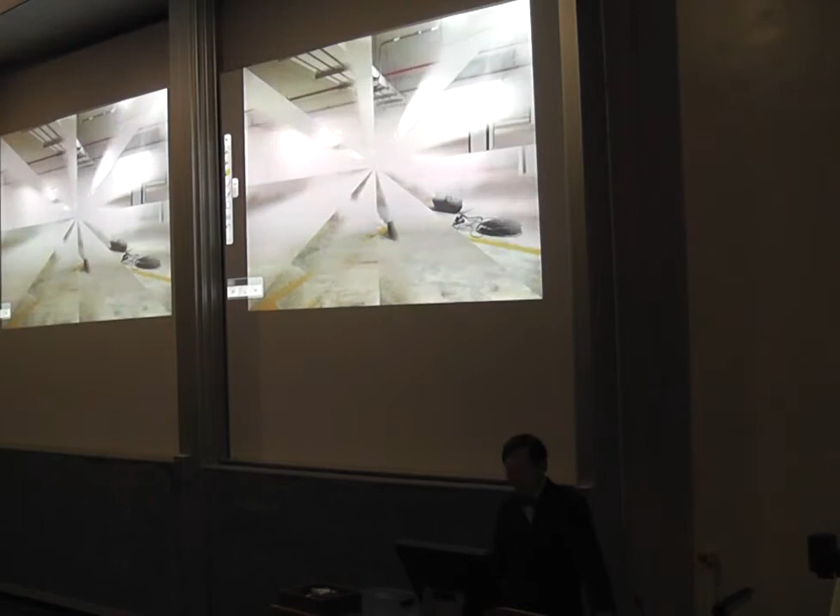So they fill up the car park, and that is not supposed to be the condition, because you should achieve a clear height of at least 2.1 or 2.2 meters so that people can escape, right? This test method is not accurate. So they started the fan, and it works, all right? After a while, all the smoke was extracted, but dragging through the entire car park. Okay.

This is when installed in the corner. I also don't know how it's going to move the smoke particles along. Now this is the extract system, right? All the smoke is moved to this corner according to the concept, and it's going to be extracted through the duct. But look again, next to it is the fire escape door. If you are going to move all the smoke to this particular area, how are people going to escape through that door? Right?

And this is inside the duct. Now, a duct of that size, when you apply negative pressure so that you can remove smoke particles, if you do not strut it properly, the duct will collapse. This was tested in BRE before, and the duct imploded. And see what they use? They use timber.

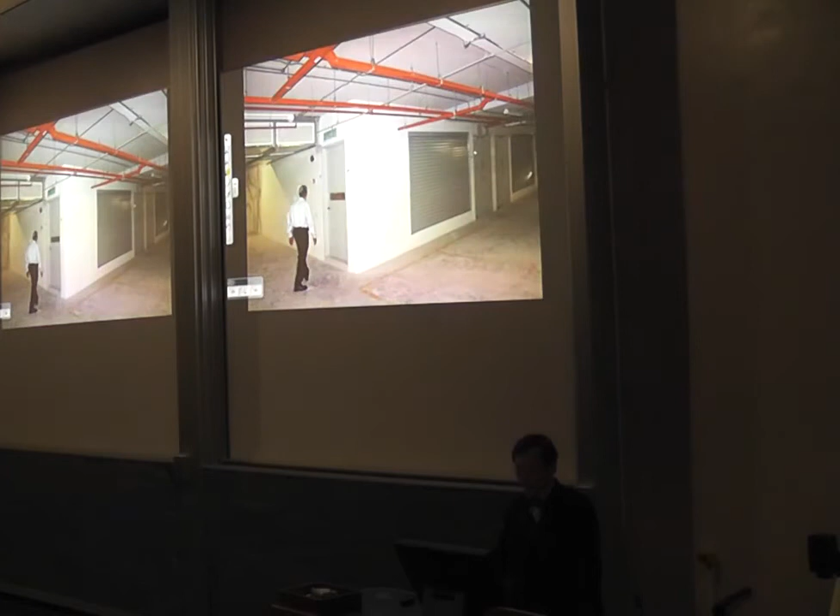Also there's a lift lobby going right into the car park from above, and they use a glass door. This is supposed to be a fire rated door. It's so dangerous. Even though they told me there's a metal shutter coming down from behind, I say if you use a metal shutter that's not insulated, there'll be heat transmitted due to radiation. Anybody inside there is going to die.

Fire engineering approach, performance-based design, is best suited for mega projects. But there are a lot of engineers who are using this to legally apply for waiver, which is very dangerous. And especially if you have a building that you only apply for part of it, it's even more dangerous. Most of these designs, if you use CFD, should be verified using hot smoke test. That's been carried out in Hong Kong quite successfully, twice, 3 times.

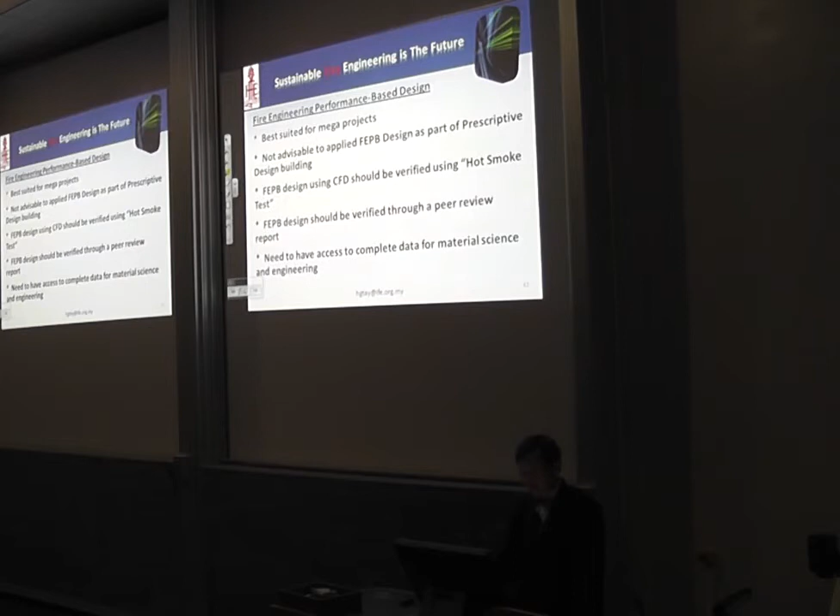And they should be verified through a peer review report. You need a third party's view. Because some of these are employed by the owner, and if you are employed by the owner, again, there is some ambiguity there.

The authority having jurisdiction that's granting approval also needs to be very well versed with the concept, because if your engineers or if the fire officers do not have the knowledge, they can't verify. Then the next question is, how can you give the approval? I think Hong Kong is one of the fire authorities that have a lot of qualified fire engineers in this area.

Also, the final occupancy hazard of the building needs to be clearly defined, because that's the basis for the assumption. So the engineer who is designing must understand the ultimate utility of the building, how the building is going to be used, in what sense, what type of hazard, what type of fuel load, what kind of smoke index, or the heat flux that's going to be generated.

Not only that, I think they need a continuity of this particular concept for maintenance of the fire engineering performance base. And the Singapore authority actually makes it mandatory for the building owner to engage such an engineer to maintain the building. I think that is the only country that did that.

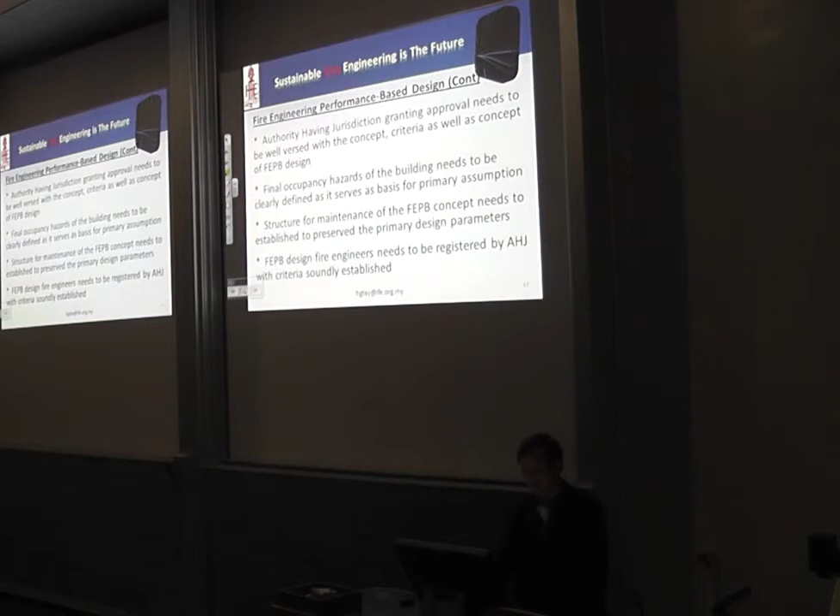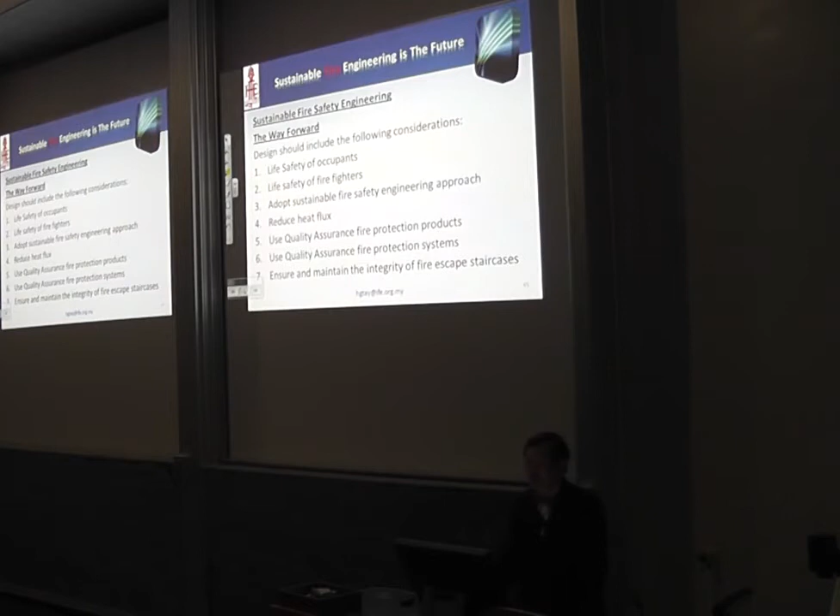So, sustainable fire safety engineering, in conclusion, the way forward should include the following considerations: life safety of occupants, life safety of firefighters. Adopt a sustainable fire safety engineering approach, not just green. We have to try to reduce combustible materials to reduce the heat flux, and use quality assurance fire protection products and systems.

All fire escape paths, fire escape staircases, the integrity must be ensured and maintained at all times. And I also believe it's everybody's part to introduce, induce, and maintain fire safety culture in the entire community. If you look at the past, if you go through all the airports, there's no announcement. Now they announce so often that if you see luggage unattended, please notify the security. So it becomes now part of your life. You go through the airport, you start looking around. Yes, that's fantastic education, but not in the fire safety area yet.

We also must induce preventive maintenance of active and passive fire protection concepts, products, and systems, because you do not wait for a product to fail, then you change. Some of these protections are critical. By the time it fails, and the lead time is too long, you do not have any protection. So this is very, very important.

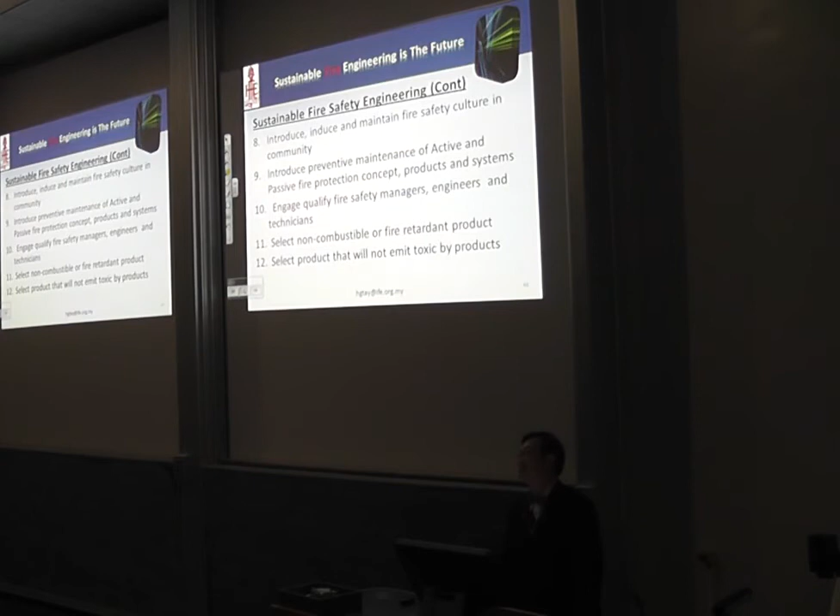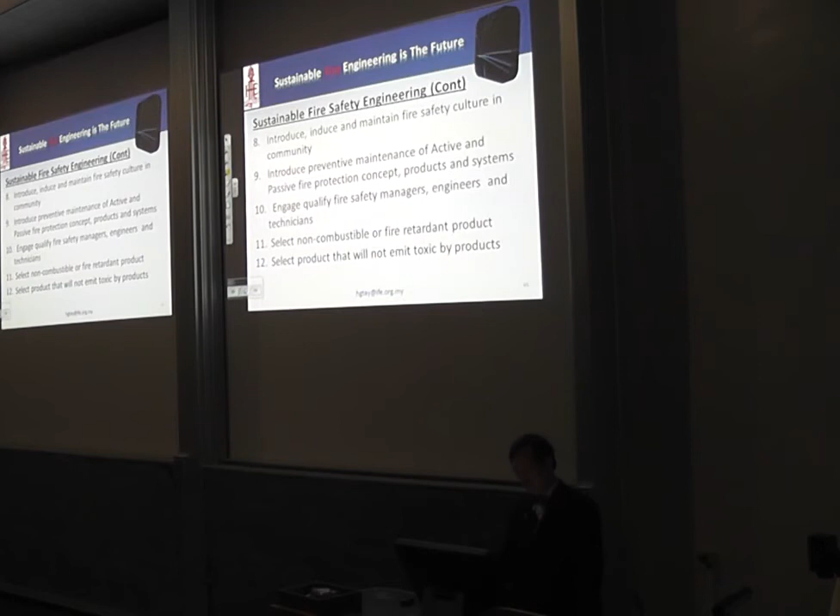We must also engage qualified fire safety managers, engineers, and technicians. There are so many who claim they are fire experts, but who verifies that? There are so many cases going on. Select non-combustible or, not fire retardant, fire resistant products. Design should also take into consideration RSET and ASET, which is not being applied by a lot of engineers.

And fire escape staircases should be located at the furthest distance from each other. A lot of architects like to put two staircases back to back in the same shaft. They have not learned from the 9/11 incidents. When there's an explosion, you have nothing, all right? So you need redundancy. Redundancy means that if one of them was destroyed for any reason, you still have another one to go down. If you put two together, of course, design-wise it saves a lot of money, but it's not safe.

Design should also integrate passive and active fire protection concepts. Both must go together. You cannot rely on active alone because they are for the post-fire scenario, and that is not so good.

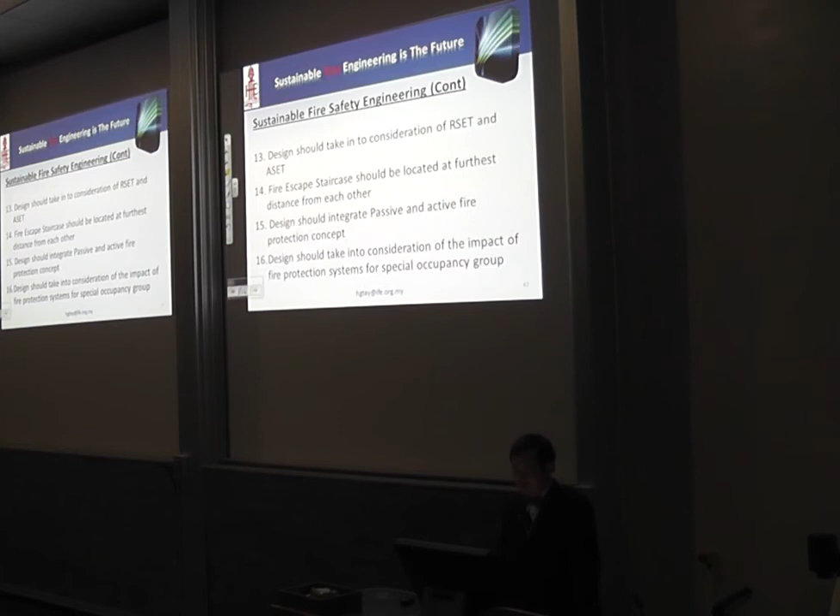And I think we should also look at specific occupancy risks. I presented a paper at the Asia Built Hospital conference. I asked them a simple question, they had no answer. I said, you spend so much money tagging all your patients. How much money do you spend to evacuate all your patients whenever there's a fire incident? Just imagine newborn babies. Where are you going to put them? The assembly area? Newborn babies? What about ICU patients?

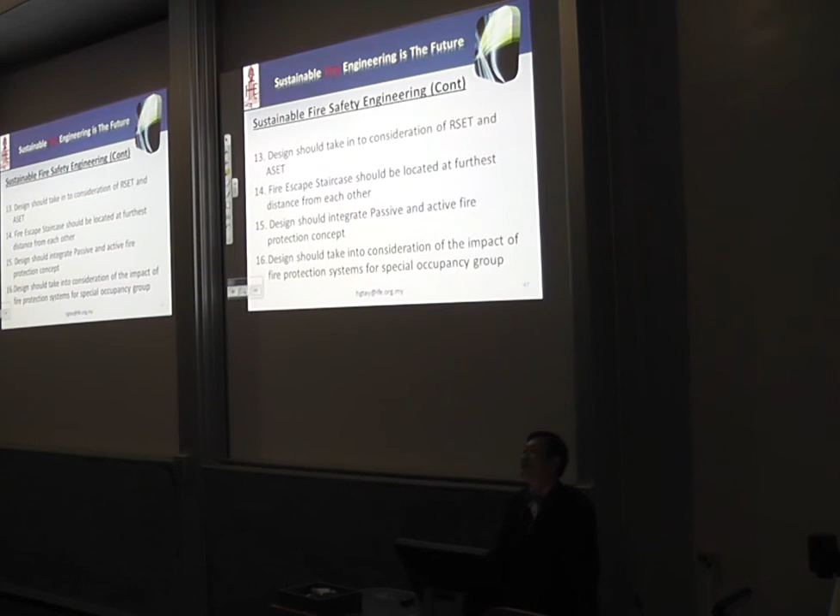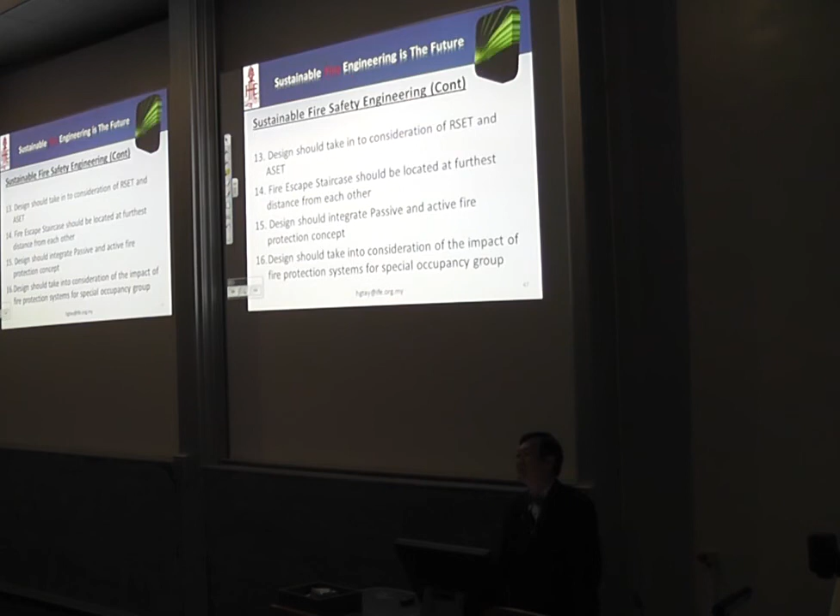And I say you also need a weather forecast expert, a consultant. How do you know it's not going to be raining outside that day? What about the commotion when the fire protection system operates, the sprinkler system operates with the smoke? Will the patient die of a heart attack? Thank you.

A tremendous talk, everyone, and very, very powerful questions. Gives us a lot to think about.